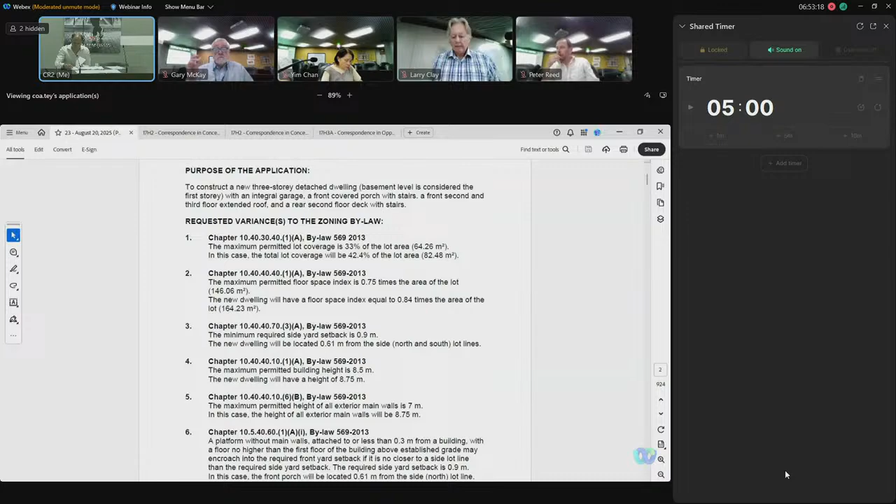Through the chair, we have the agent here in person and 6 registered speakers.

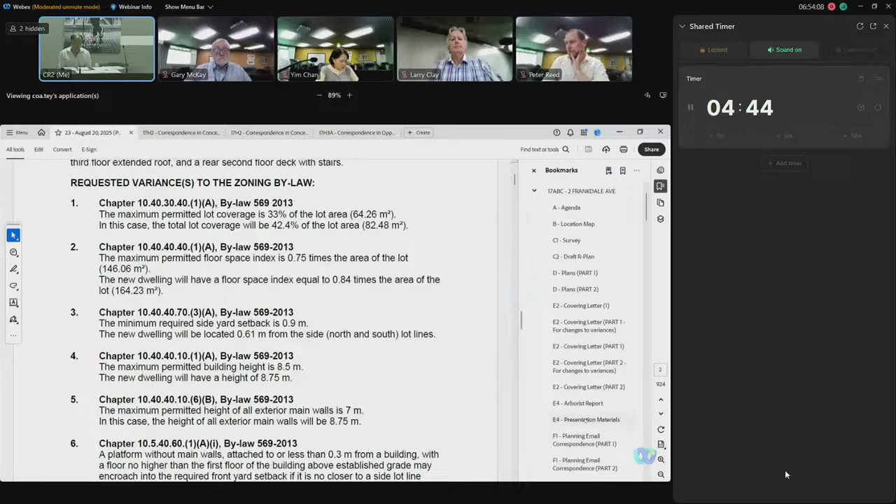The existing lot is fronting on the west side of Frankdale Avenue. To the south side is adjacent a private laneway serving a row of garages to the properties at Milverton Boulevard. To the north and to the west side, properties of single-family homes are adjacent.

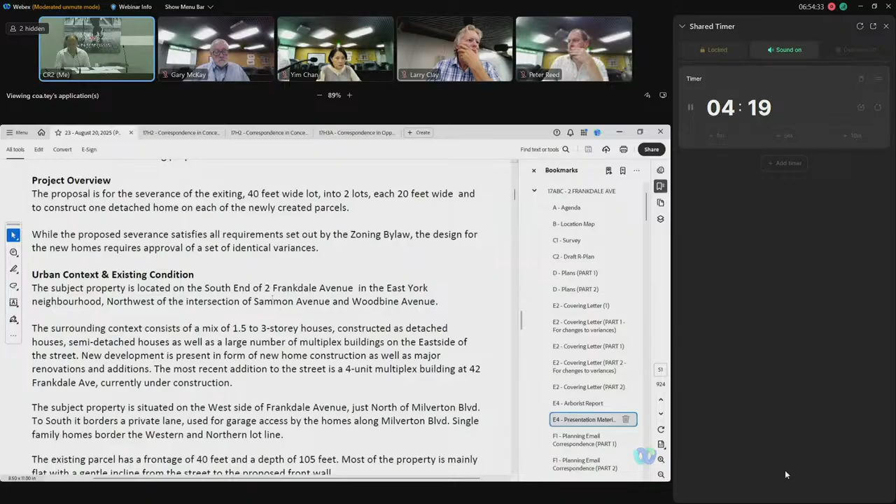The proposed severance does not require any variances, and similar frontages as the proposed can be found on the street and throughout the neighborhood. The proposed 2 homes are 2-story homes, while the notice says it's 3 stories.

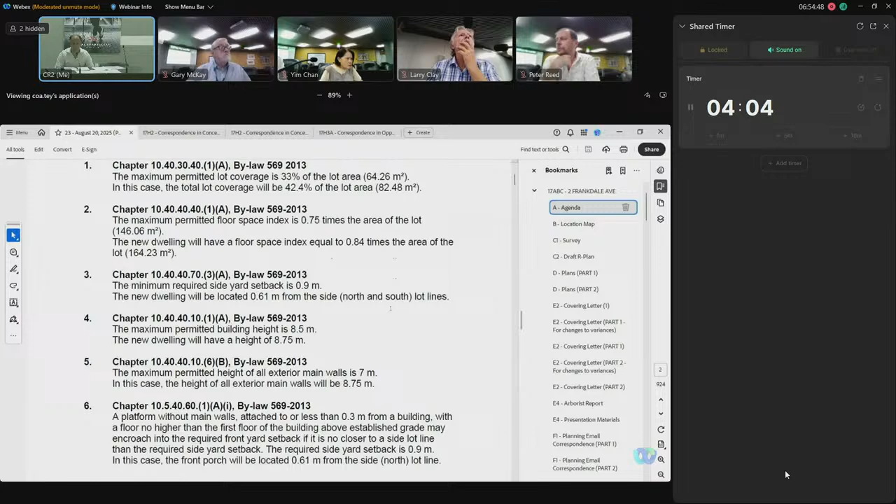The applicant—the examiner suggests that the garage, the integral garage, is the 1st story, and the 2 living stories above are considered the 2nd and 3rd floor. The garage is not below grade, and therefore, assuming that was the intention, naming it a 3-story home. But the zoning bylaw considers it a 2-story home.

Each of the homes is a 3-bedroom home in similar size and volume as can be found throughout the neighborhood. Each home is designed with a private driveway leading up from the street to the integral garage.

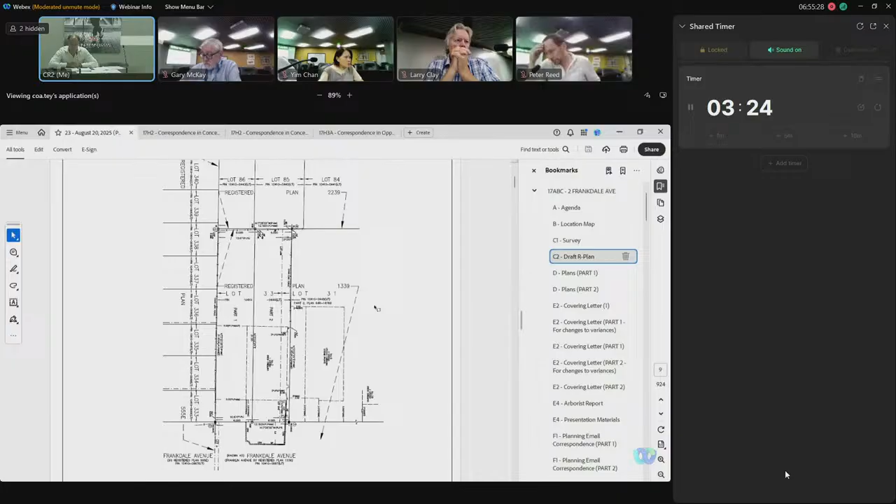Our application suggests the same 8 variances for each of the new homes. The proposed variances relate to lot coverage, floor space index, side yard setback, as well as building height and main wall height. The proposed variances are individually, as well as in their combination, very similar to approvals given in the past by this committee and are similar to the existing housing stock in the area.

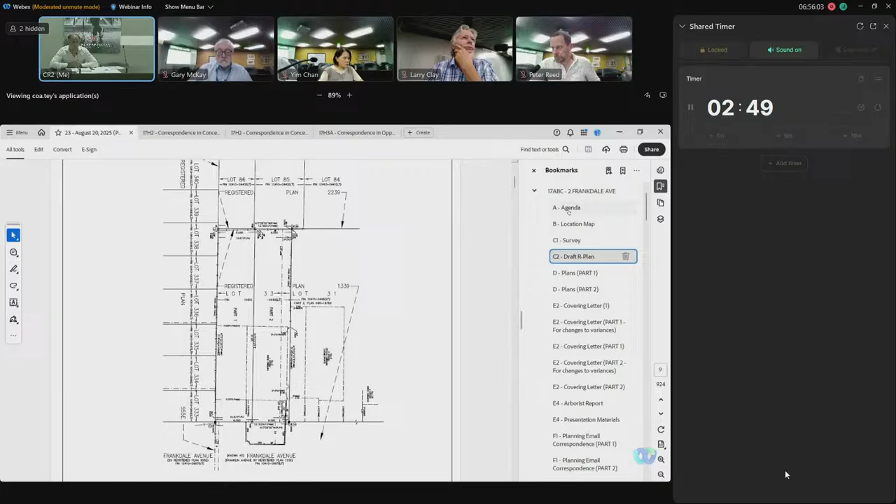I want to go a bit more in detail about the 2 variances regarding the height, as there seemed to be some confusion around the neighborhood. There's one variance that suggests a building height of 8.75 meters. If we could pull up the presentation material on page 3, there's a diagram illustrating this.

The 8.75 meters in height are 0.25 meters or 10 inches higher than the permitted, but this only applies to the front part facing Frankdale Avenue. It's a small parapet wall, which exceeds the permitted building height. The rest of the building and along the side wall as well as to the back satisfy the requirement of 8.5 meters.

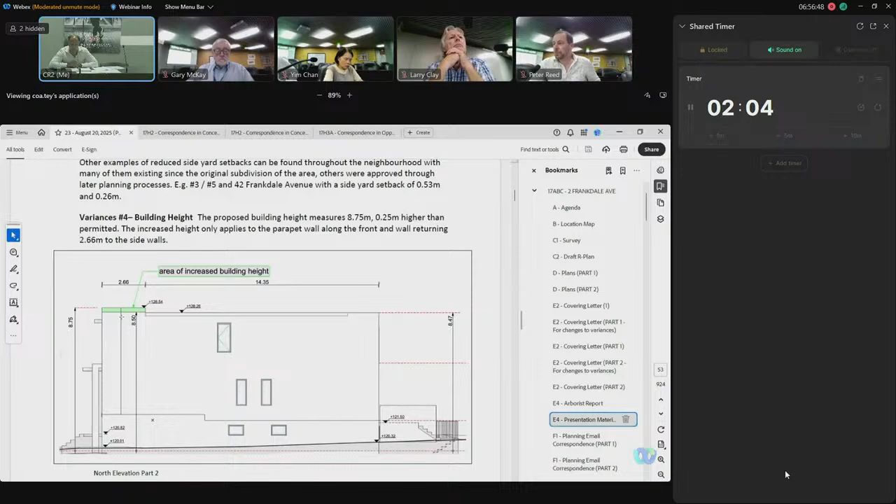The second variance regarding height is for the main wall height, which only references the front main wall and the rear main wall according to the bylaw. If you please move forward to page 4, it shows a three-dimensional illustration, while the left illustration shows the as-of-right height development. The right one is the proposed. As you can see, the difference between those two is marginal.

And even though the delta between the two numbers, between the proposed of 8.75 meters and the permitted of 7 meters, might sound high, as you can see, the difference is not very much.

Several submissions to the committee from the neighbors assumed that the homes would be 1.75 meters higher than permitted, but this is not the case. The total building height is only 10 inches more than permitted, and that only applies to the front.

Furthermore, the proposal satisfies all requirements regarding landscaping and soft landscaping. It will require removal of one protected tree at the south property line. The remaining trees, protected by city bylaw, will be protected during construction and will remain on site. Transportation services and community planning both provided comments and had no objections to the proposal.

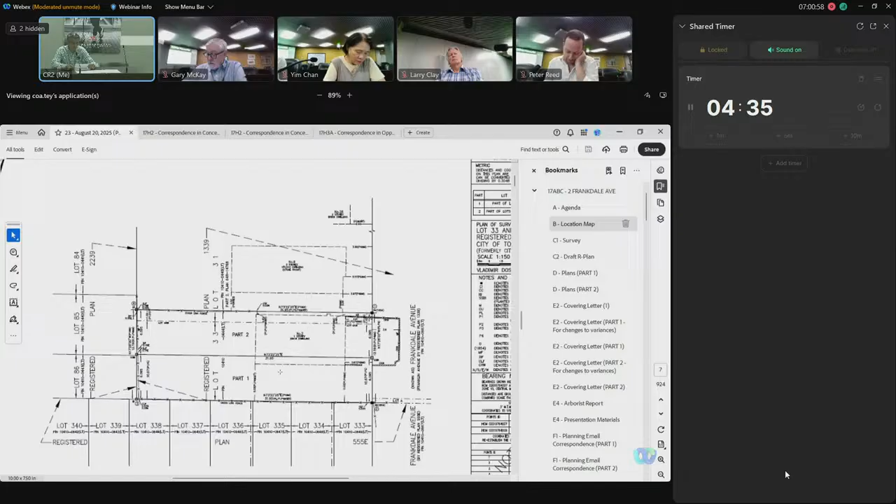Firstly, that the northern side of Part 2, the northern building, shall be kept clear of any below-grade windows and therefore window wells or similar structures. Second, that the northern side yard setback shall be kept clear of any fencing or similar structures from the front property line to the proposed wall. The northern side yard setback shall be paved from the public sidewalk to the proposed rear main wall.

These considerations would limit the impact on our current parking situation at 6 FRANKDALE, and ensure safety for both ourselves and the new residents.

In addition, we've agreed that the rear deck must be constructed with opaque privacy screening or fencing that is permanent along the northern edge of the deck, to a minimum height of 1.5 meters measured from the floor of the deck, and that any north-facing windows on the north frontage of Part 2, the north building, on the second floor above, should be constructed with frosted glazing in order to address any privacy concerns between ourselves and the new residents when they move in.

These considerations would address, I'd say, our two primary concerns with the proposed development. If they are attached, I don't know the mechanics, but if they are attached to the approval as conditions of the variances, then we would be prepared to withdraw the remainder of our objections. At this time I'd like to reserve any remaining time to discuss those objections if these are not ultimately agreed. Well, we can't let you do that, sir.

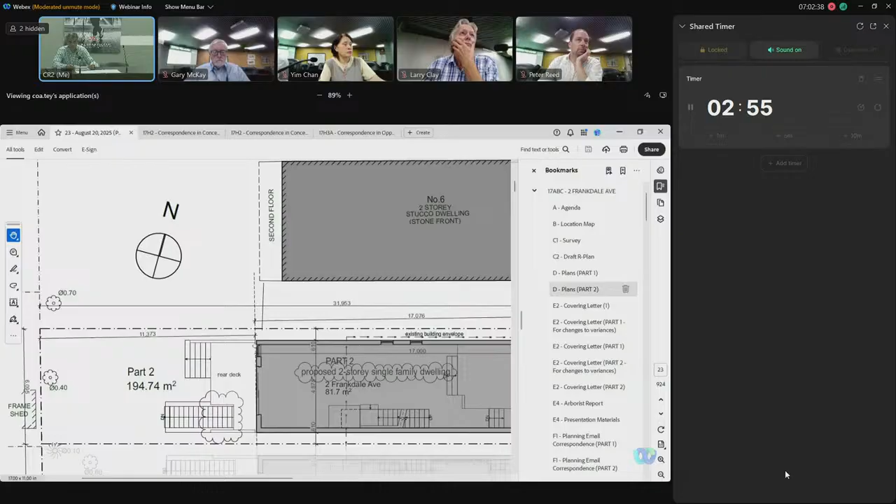You get one shot. So if you have come to an arrangement with the agent along these lines, he'll reflect that when he returns. Very well, you have the rest of my considerations in my letter, and you can reflect on them and consider them as you see fit. Great, thank you very much, sir.

Any questions now? Sorry, through you, Mr. Chair, perhaps we can just talk about which conditions the committee is in a position to consider, rather than those out of the hands of the committee. Good point, yeah.

Saying no windows on the lower level, my concern is about safety and building code. As for no fence or structures, we can't impose that condition because we don't know what could happen in years to come, and if it's as of right, the committee isn't allowed to impose something that is as of right. The paving from the front to the rear, maybe semi-permeable or permeable materials, but that's something up for consideration.

The rear deck screening, yes, the committee can impose that condition. And the frosted windows on the second level, the committee can also impose that condition, okay? Just for the benefit of knowing what the committee has the right to do and not. I understand that, sir.

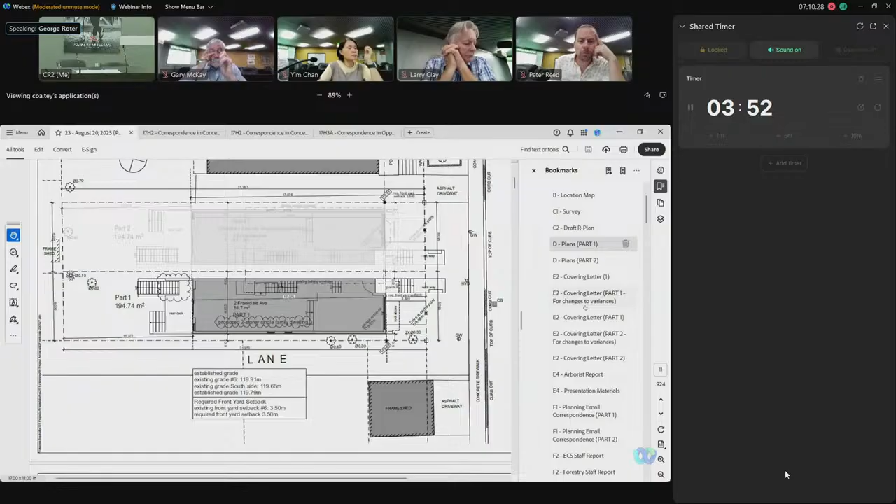What's there right now is a series of trees, not all protected. Some are a fence that separates things, and it has a backyard for us that is highly enjoyable, and that would change entirely with this development. The setback variance requested would reduce and change that dynamic. It would likely require removal of the fence and that separation. So that's one of our objections to how this is presently proposed.

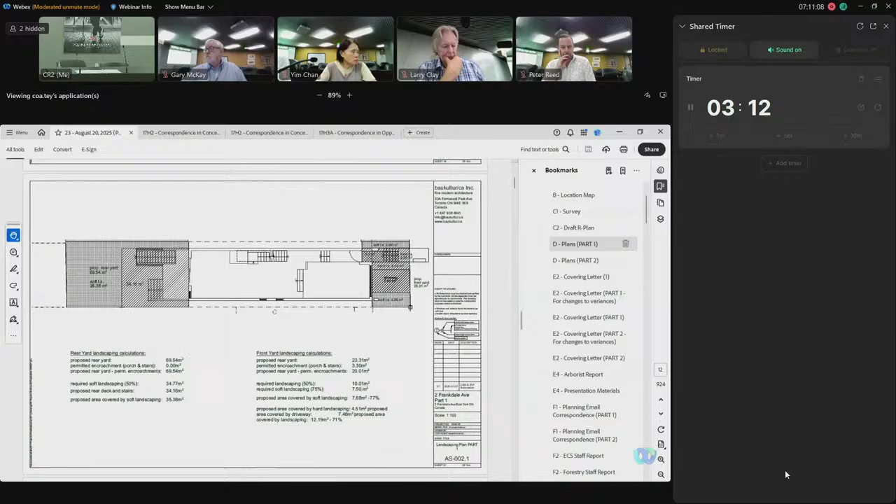The second objection is related to safety and drainage. The laneway is actually about 60 centimeters lower than the property of 2 Frankdale. What's holding that height difference is, first, there are no buildings really up against that line, so nothing is putting strain on it.

Second, there's a ton of vegetation and trees, not all protected, many aren't, but it kind of holds that area intact. Our concern is that once you start building close to that laneway, even closer than what's allowed under the bylaw, you're going to put strain on it, and there's no reference to reinforcing that.

There's no reference to a retaining wall that would make sure it's safe and maintained properly. In addition, you're removing fencing and vegetation, which is really a privacy screen. So we're concerned about that fence line and the development coming up so close to it with the variances proposed here.

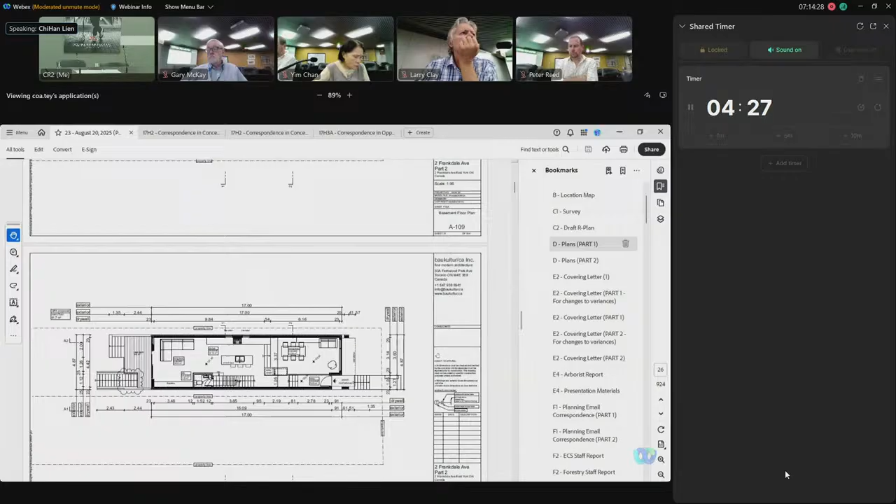That's not the same as a curved roof with a building height of 8.75, with the sides being a little shorter. That will have a large limitation on the view. So privacy is a big concern of mine, and drainage as well.

This past winter, with lots of snow, that back laneway is private for us, so the city doesn't plow it, we have to shovel it ourselves. Last winter I had to shovel nonstop as our cars kept sinking and getting stuck there. So we need space for the snow to go, and I have concerns with the south property being built that close to the line, exceeding the variance, and what that would mean for drainage and our ability to effectively use that laneway when there is water and snow.

I believe the application did call for removal of mature trees as well, including the one directly behind my property, which also provides shade and privacy. So those are really my concerns there.

I do echo that yes, there are buildings in the neighborhood with similar heights, but as George mentioned, they are all semis, not detached. I won't take more time since a lot of the points are similar, but really building height, privacy, and the use of the laneway and water drainage are my concerns.

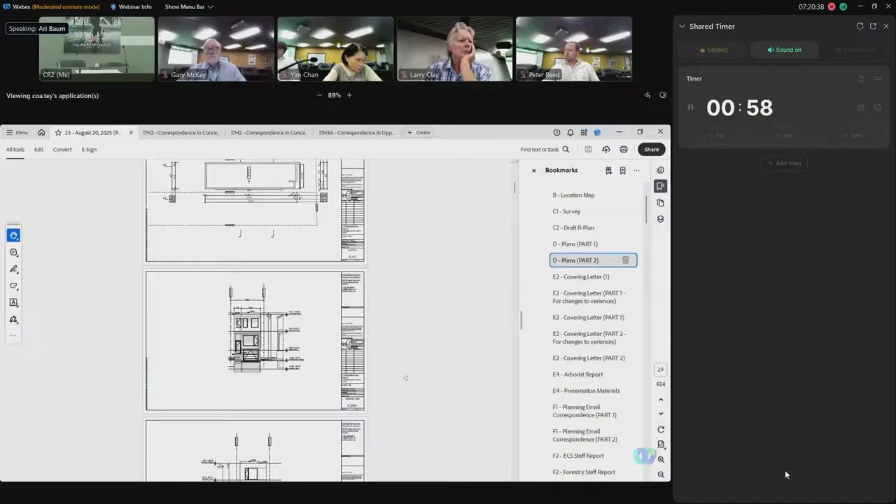So the variances altogether, all 8 of them, fundamentally alter the allowable built form, resulting in crowding and loss of neighborhood character, and risk setting a precedent for more out-of-character builds on both Frankdale and Milverton, which we don't want to see. The concern is also that the majority of the trees will be removed. I know a lot of them aren't protected, but we currently vastly enjoy the urban forestry in place, from a privacy and shade perspective, and don't want to see that altered.

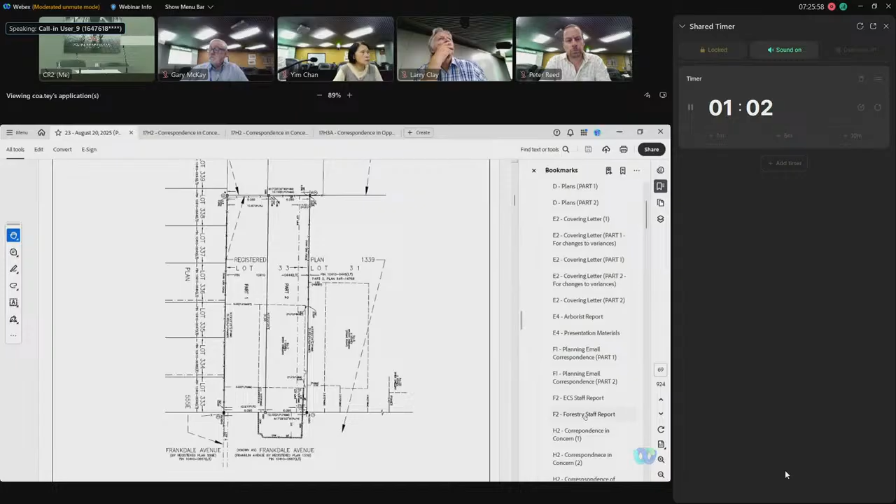Hi, this is Rick Brown. I reside at 170 Milverton, also south of 2 Frankdale. And I will probably sound like I'm echoing a lot of my neighbors' concerns.

I would like to confirm that I do support the applicant's right to redevelop, yet respectfully ask for the application to be deferred or denied for revisions based on our community feedback. Like others before me, my main concerns are that the 8 variances in their aggregate are not minor and will dramatically change the neighborhood's character, reduce privacy, potentially create erosion and drainage issues, and could ultimately affect property values.

Reinforcing the discussion of the need to remove trees along the south boundary, including one tree that should be protected by the City of Toronto, in addition to harming street aesthetics, wildlife, and privacy. I'm certain this is likely to cause drainage and erosion issues.

I would prefer to see maintenance of the 0.9 meter standard side setback to alleviate some of these concerns, or at the very least, if this proposal is approved, some sort of formal landscaping plan to mitigate the risk of erosion and drainage issues.

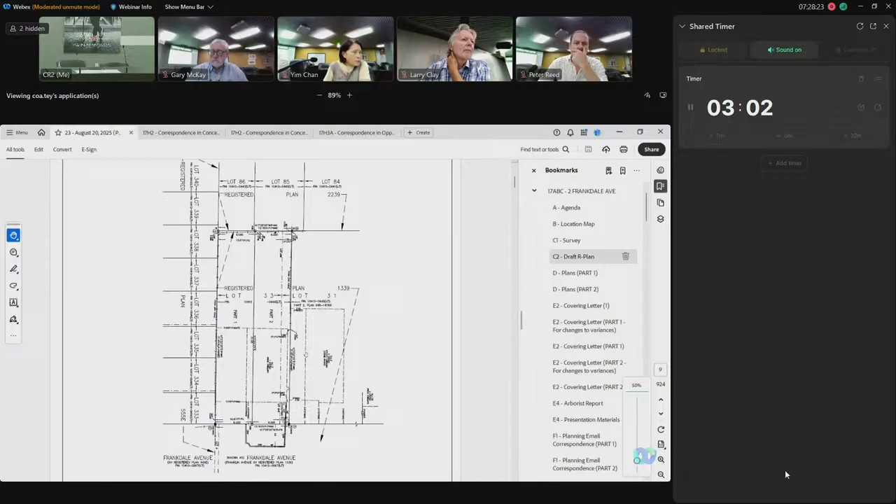It's not clear to me what future homeowners will do with their snow other than push it onto Frankdale Avenue. This will reduce visibility, further narrow our one-way residential street, and overall reduce driver safety in the winter. I know that's perhaps outside of the committee, but it is an implication or certainly impact of the proposal, and I just wanted to raise that as a potential issue.

And finally, while I'm not as technical on some of the bylaw rules and variances, I believe the applicant stated that the height variance was very minor and only applied to the parapet along the front facade and its return along a portion of the side facade.

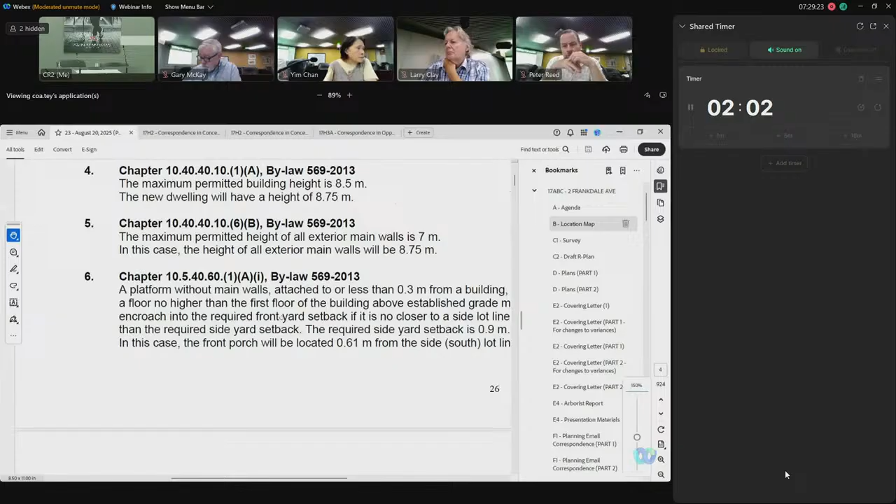Perhaps the committee could clarify, because the applicant did not mention that variance 5, I believe, requires the height of all exterior main walls to be no taller than 7 meters, including 100% of the sidewall. So again, I'm not sure if the presentation of it being an extremely minor height variance is accurate, or if it is in fact in excess of 1.75 meters, which, as others have called out, is extremely out of character and will tower over the existing buildings.

I really appreciate the time. Sorry I couldn't be there in person, and I look forward to hearing your decision. Thank you.

Panel, any questions? All right, I think that's the end of our speakers. Maybe we'll have the agent back.

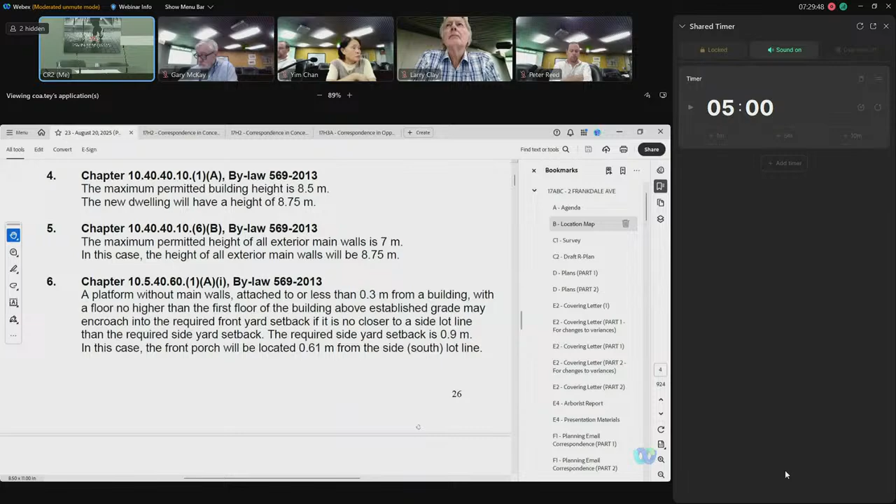So I'm going to be a little unconventional. One of the opponents indicated a series of conditions that you've agreed to. The other opponents are simply opposed to a whole bunch of things. So I'm going to cleave your time into two, because I think I owe it to that one individual to confirm your agreement to the conditions you've agreed on. Once you've done that, I'll start the clock and you can have your 5-minute rebuttal for everyone else.

Is that okay? Yep, for sure. Okay, so let's start with the conditions that you've agreed on with 6 Frankdale. Yeah, we agreed to all these conditions mentioned. You appreciate that the committee only has jurisdiction over some, so those that we don't have jurisdiction on, if the committee were to approve this, that is something you need to form an agreement with 6 Frankdale. Yes. Okay, you're prepared to do that? Yes. All right, sir, you have 5 minutes to rebut the concerns we've heard.

Okay, so the concerns we heard were often not related directly to zoning, but one major point mentioned was the grading and drainage on the property. This will be addressed during the building permit process. The grading engineer will prepare a grading plan and make sure that all the city requirements are met. Otherwise, no building permit will be issued.

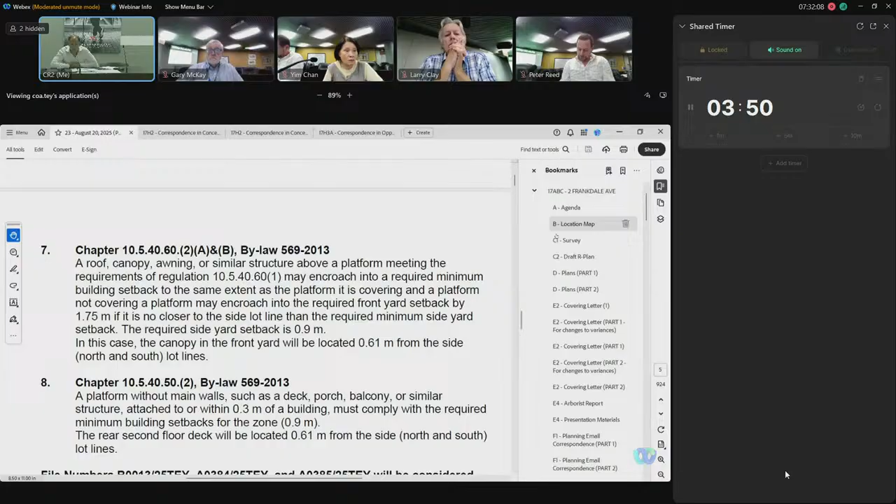Further, the last speaker mentioned the height again. The bylaw requires that the front and back wall of the building be 7 meters along 40% of these walls. So the difference between this and the proposed vertical wall to the front and back are marginal. The side wall is permitted to be at the full building height of 8.5 meters over the full length of the sidewall.

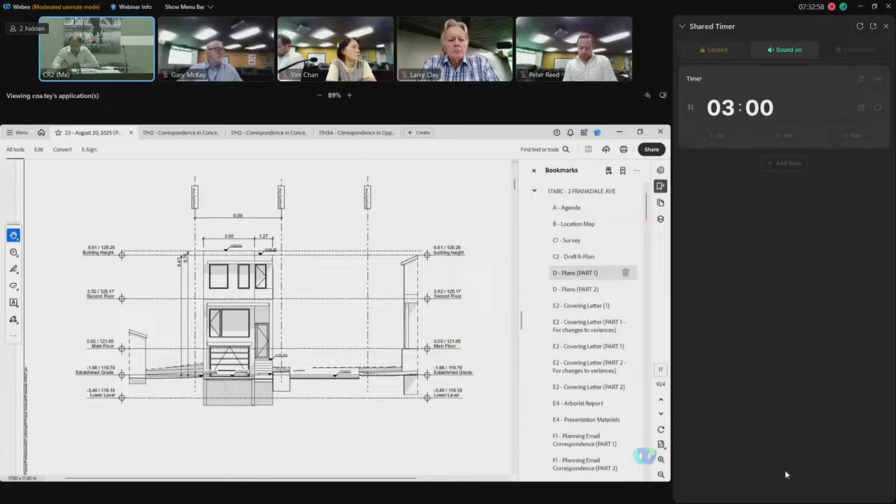Other issues mentioned were the privacy to the laneway. There are 2 kitchen windows proposed on the north side and 1 bedroom window. These windows, in my opinion, are from secondary rooms and therefore don't propose a major privacy issue. The so-called second floor deck, if you look at the rear elevation, is close to the ground and does not provide much overlook, especially considering that our client will build a fence along the wall, along the southern property line.

The mentioned objections to the proposed FSI and lot coverage, as well as side yard setback, are basically all variances. We researched the entire neighborhood and reviewed the past Committee of Adjustment positions. For every variance proposed, there can be found various Committee of Adjustment decisions which support our suggestion that the variances are minor and are in keeping with the intent of the official plan as well as the zoning bylaw. I can give you these examples, but I believe they were already provided with my presentation material.

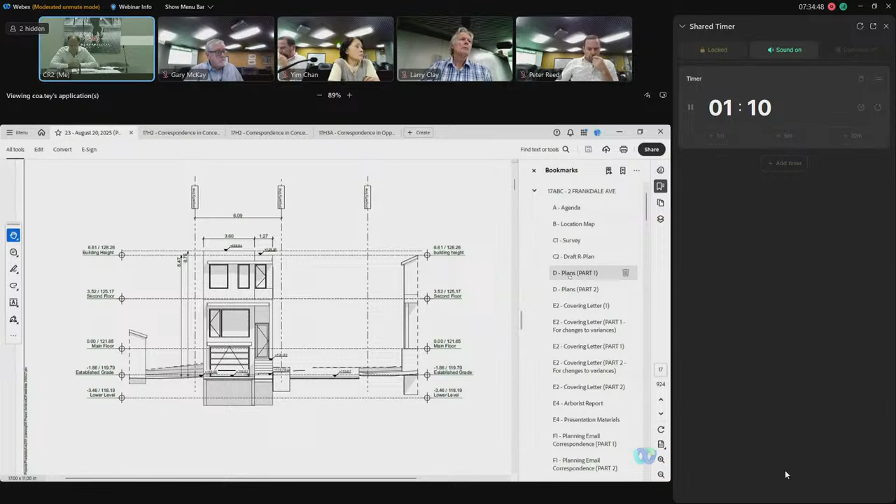One, or 2 or 3 neighbors, mentioned that semi-detached is what the neighborhood fabric is built from. There are multiple buildings or houses which are detached. For example, 6 Frankdale is a detached home. On the opposite side of the street there are multiple detached homes. Throughout the neighborhood, detached homes are a permitted use by the bylaw, so as long as the lot width allows for it, detached homes will be developed in the neighborhood and will further be part of the fabric. I believe I covered all of the concerns. All right, sir, thank you very much.

Panel, questions? Just a clarification - can the staff bring up on the package F1, the planning email, part 2? If you scroll down, it's F1, planning email correspondence, part 2. There's only 1 sentence on that correspondence. Yes, that one - I wonder whether this has been addressed and is outdated already.

It's mentioned that there's a deletion or elimination of variance 5. That variance, or that email, was produced after he submitted a set of revised plans. So that one is not even included in the notice in our agenda? No, okay, that's before the notice - I just wanted to clarify. I thought that there's a missing variance. Okay, thank you. All right.

Anyone else? Just with respect to the exterior main walls, there had been a question about height there and whether the height of those walls included a parapet or not. Yes, they include the parapet. The numbers in the notice include the parapet height. Thank you. Anyone else? Thank you, sir, that's our questions.

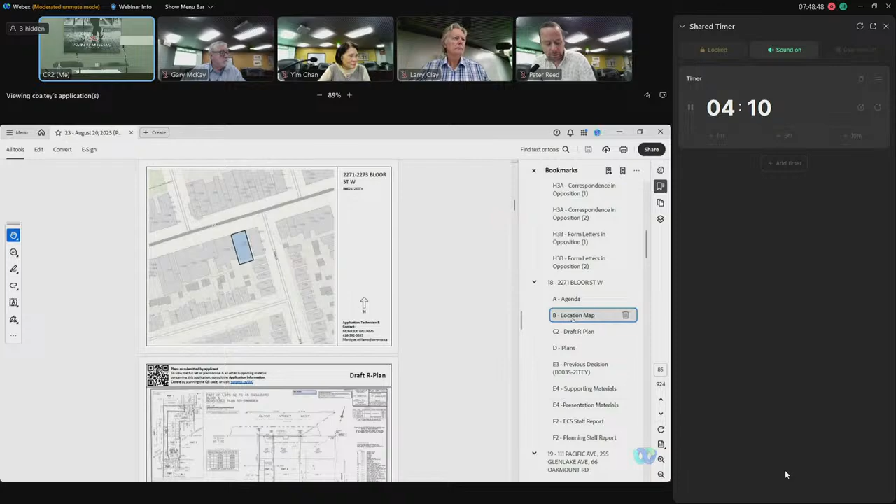Peter, you got a question? Thanks, Chair. Just to make sure you've seen the proposed conditions from development engineering regarding servicing. Yes, I understand those to be their new standard conditions that they're applying on every consent, and we're content to apply those as well. Okay, thanks. All right, thank you very much, sir.

We'll take this into committee. This looks like it's just rubber stamping what was done before. Yes, thanks Chair. I'm happy to - I think this is just a question of timing. But what's being asked for is very reasonable to permit the usage of two buildings. So I move approval of the application subject to the development engineering conditions. Motion by Mr. Reed, seconded by Mr. McKay. All in favor? You have your approval. Thank you.

Move on to item number 19. 111 Pacific Ave, 255 Glenlake, and 66 Oakmount. This is an application to obtain consent to sever the property into 7 lots with a residential development and create various easements and rights of way. There are no variances to this.

Committee has before it a copy of plan of survey, site plan, floor plans, and elevations, copy of draft plan of survey, landscape plan, 130 photographs of trees on the subject property, covering letter from the agent, an arborist report, presentation materials from the agent, and a site-specific zoning bylaw affecting the subject property. We have email correspondence from community planning and a staff report from engineering construction services.

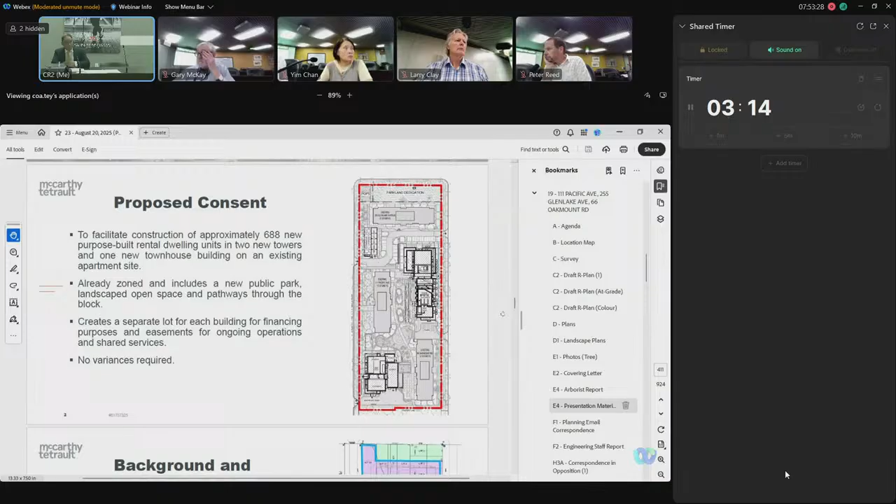It does not extend all the way south to Bloor Street, but it does have 3 existing apartment buildings on it. You can see one fronts on Glenlake and the 2 slabbier buildings each front on Oakmount and Pacific. In 2022, the OLT did rezone this land to permit 2 additional towers, which you can see on the diagram, as well as a townhouse building.

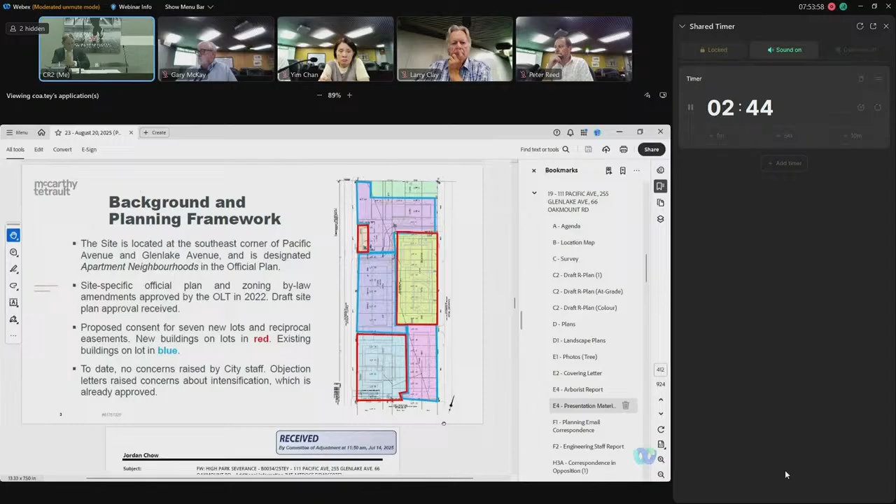The approved development will include new outdoor amenity space and will provide a new public park. The park is shown in green there and will front on Glenlake. A site plan application has been submitted, and the owner has in fact received notice of approval conditions. So this development is approved.

All we are doing today is creating new lots and associated easements. There would be 1 lot for each of the park and the existing and new buildings. The zoning standards do not need to change, which is why there are no variances in front of you. There's a provision in the zoning bylaw that notwithstanding any severance, the zoning will continue to apply.

As you have probably seen from the application, the list of proposed easements is rather extensive. That is in anticipation of the community operating as a single community and providing access to shared amenities.

Just for context, the new buildings are anticipated to be rental buildings. The existing buildings, the owner has agreed to maintain those as rental. And just a bit of background on the zoning, there is provision of new affordable housing units, at least 36 of them. 10% will be 3 bedrooms, 30% will be 2 bedrooms.

The owner has also agreed to provide new accessible washrooms and laundry rooms on the ground floor of each of the existing buildings. There will be a new indoor pool as the outdoor pool will be demolished. There will be new landscape improvements.

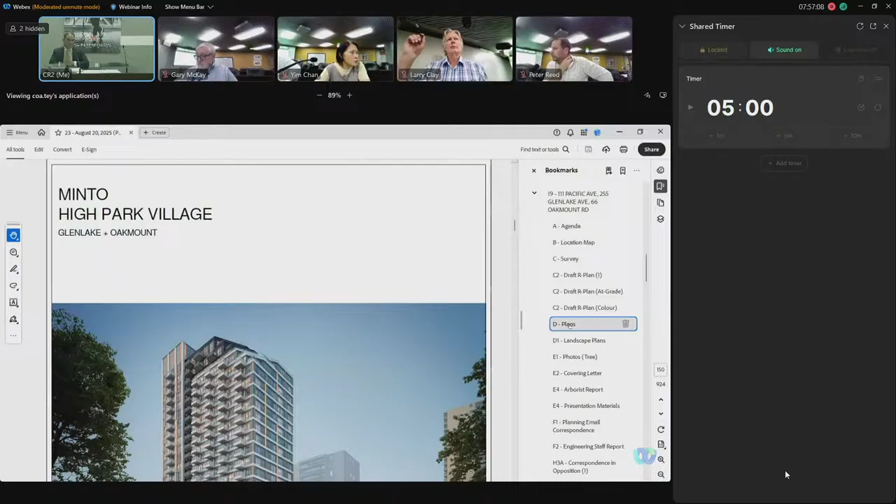Is that going to be privately owned public space, or are you ceding those lands to the city? So on the diagram that was in the presentation, shown in green, that space is a public park, a city park. That is city park right now? Yeah. Oh, it already is? No, it will be a city park. So you're ceding the land to the city? Yes, that's correct. Okay, that's what I was wondering. All right. Thank you, sir.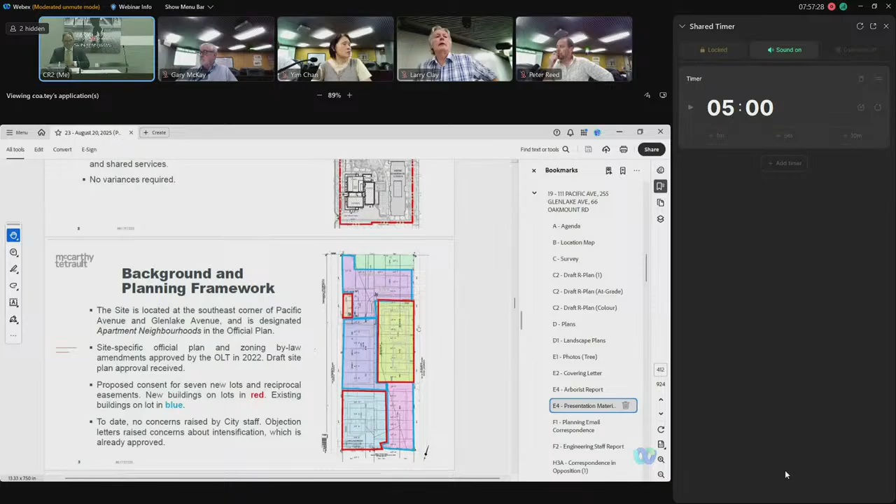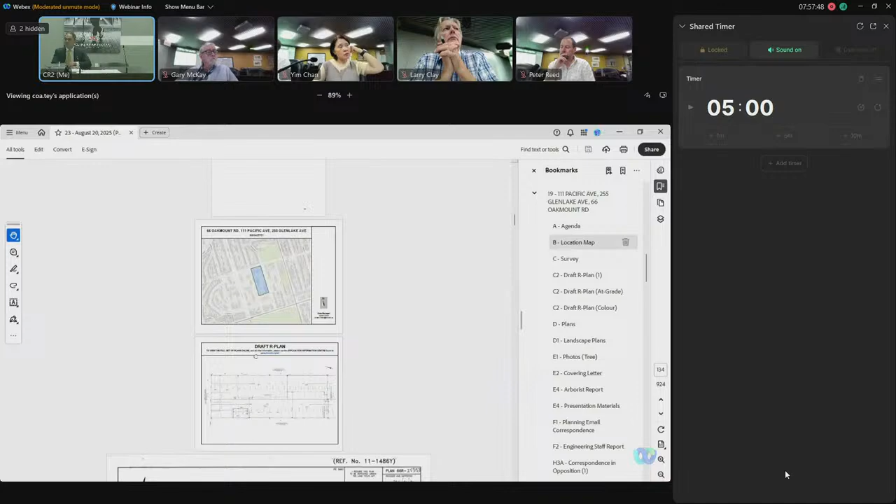Panel, any questions? We have some speakers lined up. All right. Oh, yes, you do. Phil, go ahead. Just an overall clarification. I understand the severance is needed partly to convey that park to the city because it needs to be severed from the rest, and this is to put in place what's already happened at the OLT. But what's the rationale, given the number of easements, and you mentioned it's meant to continue to function as one community, what's the overall rationale for your client if they're all going to be rental towers, all as one community, wanting to have the severances?

So financing a piece of land this size with this many buildings on it for construction purposes gets very, very expensive very, very quickly. So it is easier to finance the buildings separately. It would also facilitate phasing if phasing were required. Yeah, so to attach the financing to the actual towers as they go up. Yes, that's correct. Okay, thank you. All right. Thank you very much, sir.

We'll hear from some of the speakers. Is there anyone in this room who wants to speak to this item? Ma'am, are you speaking to this item? Well, are you registered to speak, ma'am? Yeah, come on up then. Hi. No, is your red button on there? Button? Okay, yeah, that's it. If I have your name and address, please.

I'm Valerie McLean, I'm at 103 Glenlake, 255 Glenlake Avenue. I'm a brand new resident there, so I felt I didn't get a chance to exercise my right or anything. I didn't know anything about this project until a month ago. So I'm a little uneasy about this whole project because when I first came into this building, I found out there was an outdoor pool and a barbecue, and those are the values that I see. I'm from the Six Nations, so I prefer green space and a quiet space. I actually suffered a stroke before, so I seek a quiet retreat, a nice place to be around nature.

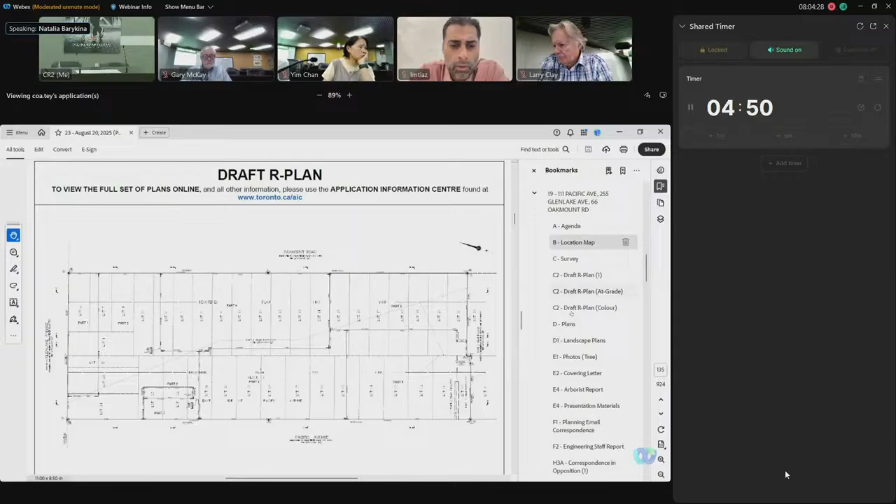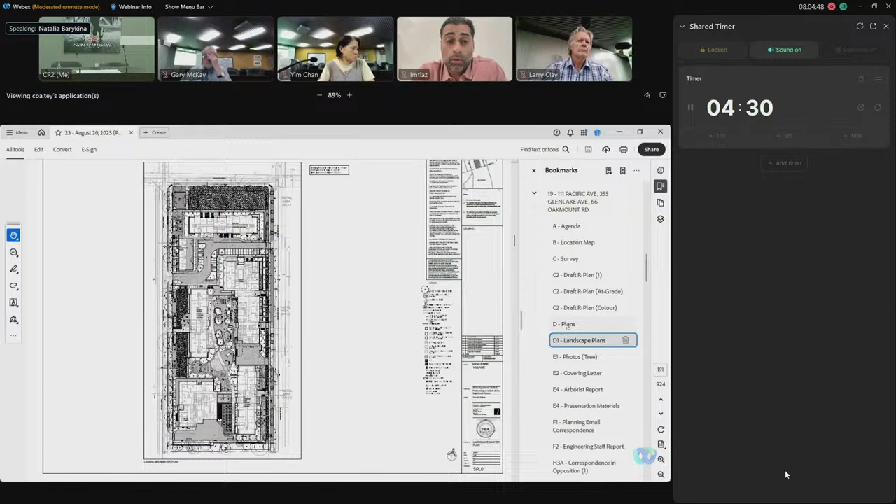Thank you. Well, I would like to express my objection to the proposed severance and the resulting development, which I believe does not conform to several requirements of the official plan. In 2018, the City of Toronto completed the area-based character study of the High Park apartment neighborhood, and this study resulted in City Council adopting site and area-specific policy number 551 regarding this area. As a long-term resident of the area, I am concerned that the proposed severance and resulting development do not conform to the policy in the following ways.

First of all, as per policy, future change and appropriate infill opportunities in the area will need to be sensitive and enhance the High Park apartment neighborhood area character. An addition of two tall buildings, I believe, will negatively impact the area's distinct character. The area's uniqueness is rooted in a tower-in-the-park idea, a plan and vision based on design of residential buildings generously spaced apart within areas of tree-covered open space, thus respecting the balance between built form and landscaped areas. The proposed addition of the two tall buildings does not preserve and enhance the park-like setting, generous open space amenity, and soft landscape areas that contribute to the character of the High Park neighborhood.

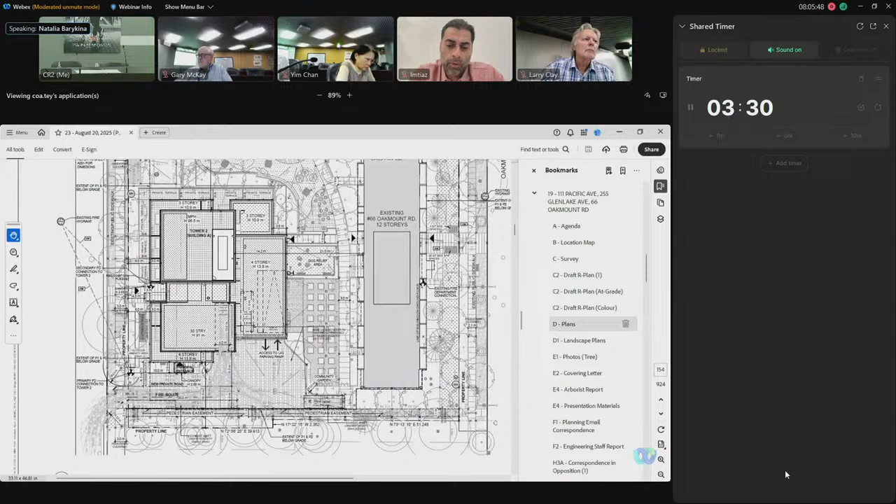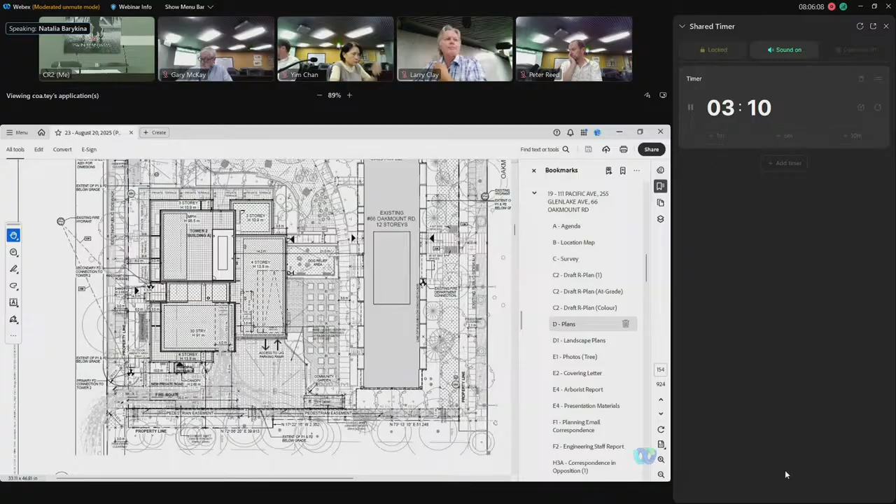The sites of the future proposed development currently include areas with mature trees, a community garden, and an open swimming pool. These lands are not underutilized. Rather, they are actively used by the residents as community spaces for much-needed refuge from heat in summer months, as evidenced by numerous objection letters and the speaker just before me. Removal of these spaces will negatively affect the quality of life and health of the community of which I am a part. I am also concerned with diminished access to sunlight, new shadows cast on open space areas.

And an exacerbation of already existing neighborhood problems of traffic congestion and noise pollution. The density increase should not come at the expense of extensively used community green spaces and the benefits they provide for physical and mental health. The proposed development also lacks meaningful integration of community services and facilities.

A new municipal park proposed for the street frontage of 255 Glenlake Avenue offers no additional benefit to the community. The already existing open landscape is being used by residents to walk their dogs and to socialize, so very much in the manner of a park. In addition, Lithuania Park, with excellent renovated amenities, is located across the street.

In conclusion, I welcome responsible development and gentle intensification of the High Park apartment neighborhood area, grounded in principles of enhancing the natural and living environment for existing and future residents through construction of new low and mid-rise infill housing, while preserving trees and vegetation, introducing green infrastructure and traffic calming measures. However, the Minto proposal needs to be evaluated in the context of similar large-scale development proposals currently in the works for the High Park apartment neighborhood area and the vicinity. Such proposals are damaging to the planning cohesiveness in environmental, community, and built form aspects. I welcome thoughtful revisions and scaling back of the current proposal. Thank you for your time and attention.

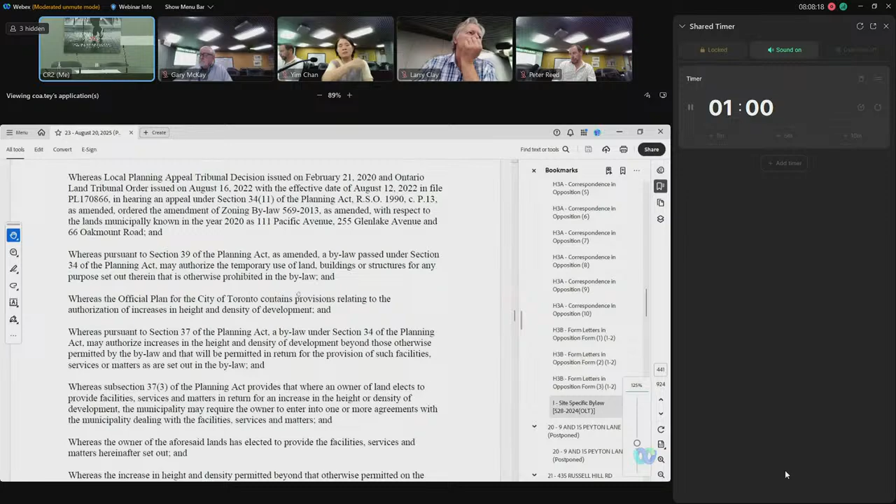I hear your objections, but I just want to point out that the additional two towers, how they're designed, the layout of the space, this has all been approved previously at the Ontario Land Tribunal, and we have no power to change that. It is approved. So all we're doing is creating, or being asked to do, is create new lots, one for each tower. Do you have any issue with the creation of new lots, one for each tower? No, I don't. Okay, thank you.

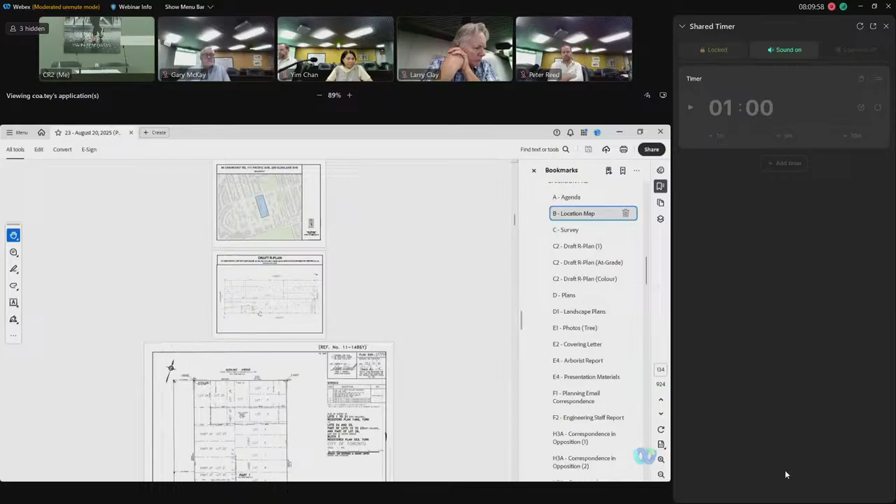Hello. Sorry, I'm just having some difficulties unmuting the speaker. MTS, we're going to try to contact you again. Through the chair, I'm just making one final attempt. Okay, all right, we've tried several times to reach, is that the 266 Glenlake? That's correct. Yeah, so we've tried several times to reach and we're unable to, so we will have to move on.

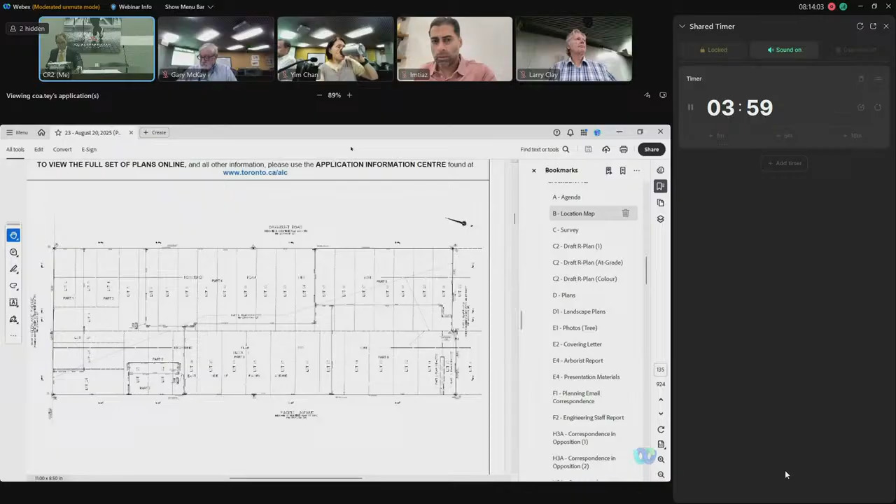All right, let's take this into committee. I think Phil makes probably the most important point here, that we're not relitigating the actual application. We're just considering the facilitation for financing and phasing purposes. So does anyone either want to comment or maybe just make a motion?

I would just make a motion because really it's a technical procedure, almost. So I will move to approve this application with no... do we have any? There's engineering. Yes, you have mentioned all the conditions, all the engineering conditions. Okay. Motion by Ms. Chan to approve subject to engineering, seconded by Mr. Reed. All in favor? You have your approval, sir. Thank you.

Okay. Thanks, Gary. Sabrina, Gary's going to head off. All right. What's that?

All right, are we good? Okay. Item number 20 has been postponed, 9 and 15 Peyton Lane. We move on to item number 21, which is...

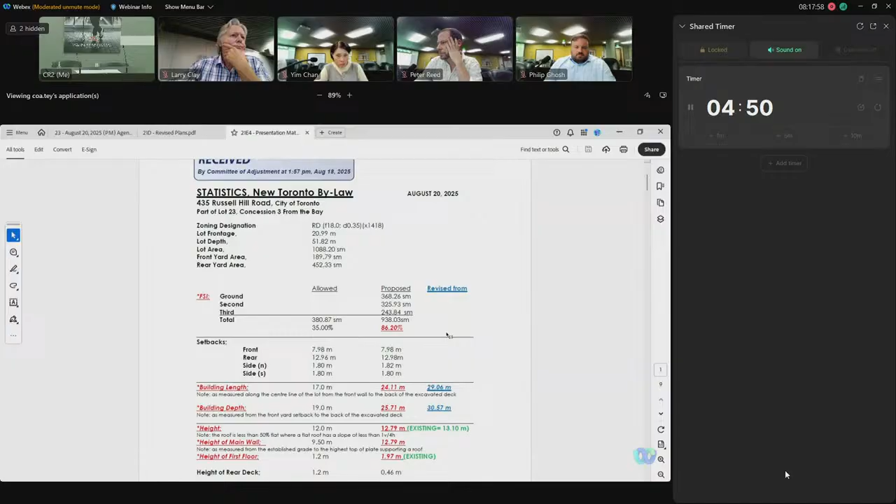So the two things, Mr. Chair, are first, there has been a reduction in both the length and depth. The new numbers, 24.11 for the length, 25.71 for the depth, they are on the public notice, so I don't officially need to revise anything, but I did want to flag for you, since the last public notice in the deferral, we have reduced the length and depth of the proposal.

The second thing, Mr. Chair, is there is now an urban forestry memo in front of you with recommended conditions of approval, should you see fit to authorize the variances. So we've worked with urban forestry to ensure that they are not recommending a refusal, but are recommending conditions of approval.

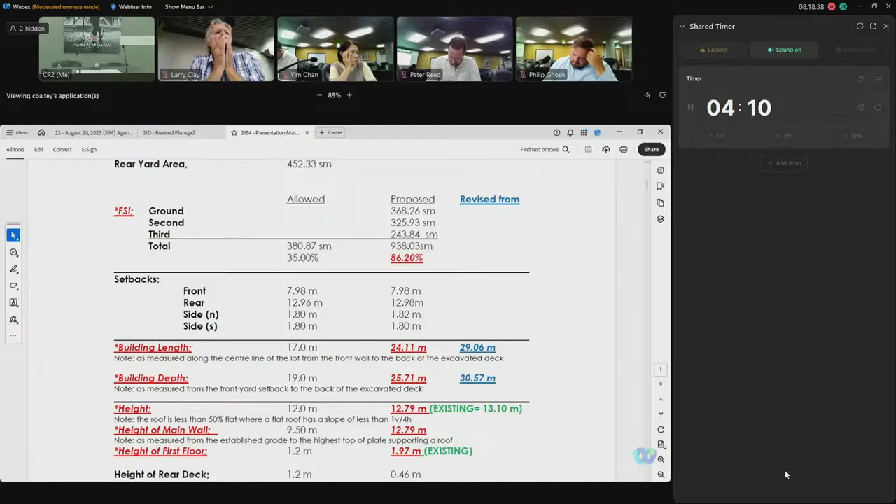In terms of the application, if staff are able to go to the second page, as usual on these application materials, what we've shown to you here in color is in green, the existing house, in red, the permitted envelope, the proposal, 3 stories, staggered, as you can see, up through the roof, which I'll show you on the colored rendering. But I think importantly, designed to maintain the staggered front yard setbacks along Russell Hill.

You can see that the 1-story addition that's on the south side, north is to the left, south is to the right. You can see the 1-story extension that is on the south side is no deeper than the existing dwelling to the south at 433. And then the staggered nature of the dwelling is such that the main 2-story portion is slightly behind 437, but that's in part because the front wall of the proposal is behind 437.

I would suggest that the committee, should it see fit to approve the variances, tie us to the site plan to ensure that the length and depth are deployed as shown.

If staff don't mind just turning to the next page, page 3, we've shown for you the different dimensions for each floor. So third floor, 18.48, second floor, 19.14. So not particularly deep in terms of a house. And then the ground floor and overall what's triggering both the length and depth at 24.63.

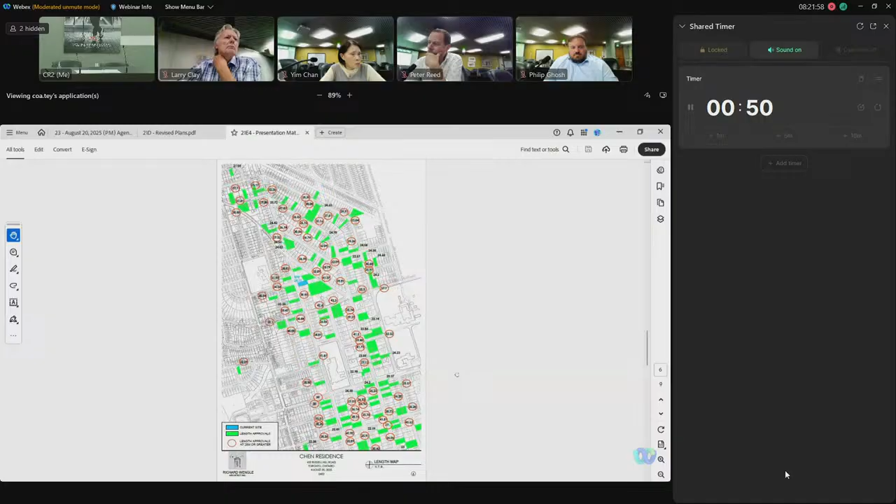Page 8, if staff don't mind, I can just show you what I mean by the staggered design. The 3rd floor is part of into the roof line. That in part triggers the height variances that are before you.

I'll just speak to those really quickly in my last 30 seconds. The existing building actually has a height of 13.1. We're proposing 12.79 when 12 meters is permitted.

There's also a main wall height variance, and that's frankly because of, and if staff don't mind, apologies, if you could just jump back to page 4, you will see on the sides there, dormers, just to allow some light into that 3rd floor. The main wall height is measured to those dormers. Those dormers don't extend for all of the roof line.

And so if the committee wanted to tie us to the elevations, we would have no objection, again, to ensure that those dormers are what are triggering the main wall height and that it's not extended beyond what's shown. So that's sort of the overview, Mr. Chair.

Thank you. Panel, any questions? Can we ask it now or we wait for the other speaker?

If it can wait, only to clarify, Mr. Bronskill, from the previous application you have reduced the depth by about 5 meters. I compared it to the previous site plan. How did you do it? Where did you get it done so you can reduce by almost 5 meters, right?

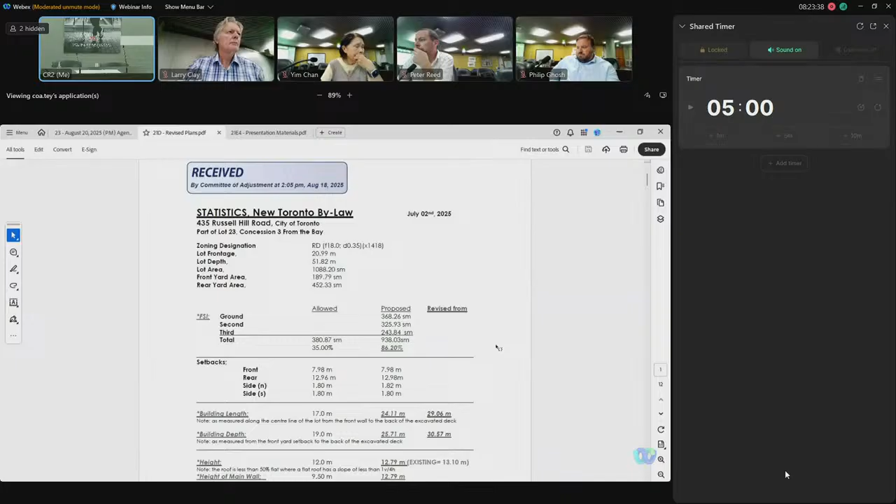Yeah, some of it comes through reductions in the excavated portions that don't necessarily count as GFA. We wanted to ensure that numerically we were reducing the overall length and depth. There was some excavated area that extended beyond and deeper into the rear yard. We pulled that back and also did the stormwater drainage assessment that was filed because there had been some concern raised with that. So the length and depth was largely, frankly, below grade previously, and that's been significantly pulled back in terms of the extent of basement excavation.

Oh, if I understand you, it means that you just reduced your excavation area. Yeah, the length and depth went much further. You can see that under the terrace that was previously proposed, there would have been excavation. You can see it there. It actually went underneath that terrace area and further back, so it frankly got close to the rear yard setback previously. We pulled that back so that it's not as deep into the rear yard.

We think that improves overall the ability for stormwater penetration, so we do think it's meaningful to do that. It takes away some of that below grade structure in the backyard. The building remains, we think, appropriately designed to sit next to its neighbors. Oh, so you pulled back by 5 meters, right? Because it's hard to, because it's very complex, these drawings. Yes, I just cannot read it. Okay, yeah, okay, thank you. No, thank you. Thank you.

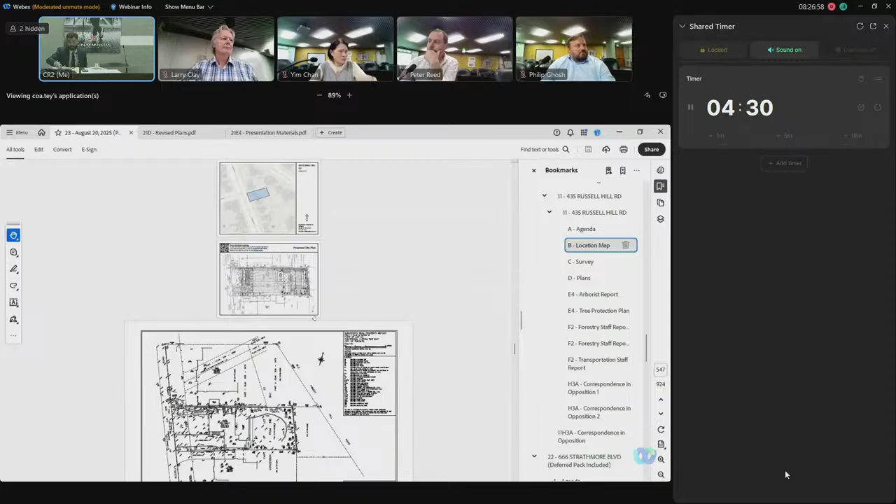My client's property is below, at a point on Russell Hill where there's a significant downward slope. What that means is that there is a portion of my client's property, particularly as you go towards the back, where we are sitting at about 2 meters below the subject property. It's a very significant change in grade that will be felt by my client. So as far as all the surrounding neighbors, it's my client who's going to be most directly impacted by this because of where they sit, and they have significant concerns with the proposed variances.

The primary variances that we have concern with are the wall height, density, and building length. I heard Mr. Bronskill talk about the main wall variance, but that's actually not the variance he's seeking. He is seeking a sidewall variance. That's variance number 1, so I think he was mistaken, and we have significant concerns with that variance. The sidewall height, you can pull up the building elevation, is where you see the 12.8-ish height. That's what's going to be felt by my client.

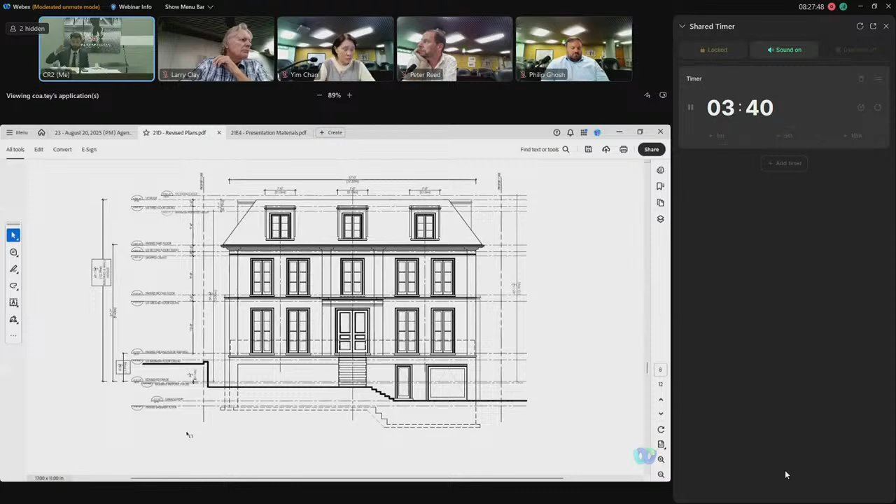I think it's a little bit misleading, actually. With respect to Mr. Bronskill, I understand why they showed it this way, but the one-story bump out at the existing property, as it exists today, is a one-story with a solarium on top. If you look at the south elevation, that is a significant departure from what is currently existing.

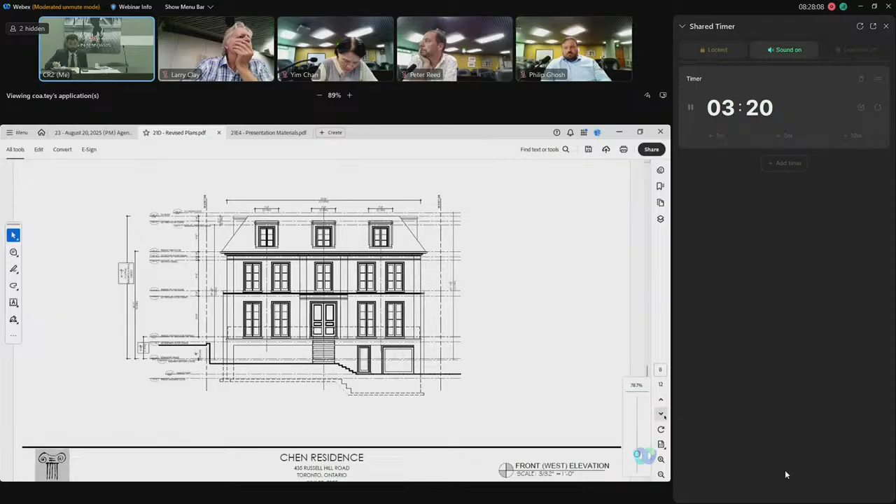Now, the bylaw permits 9.5 meters for sidewall heights. What's being proposed is 12.79 meters for 35% of the width of the sidewall, and 10.05 meters for the remaining 65%. So there is not one portion of that sidewall that meets the bylaw requirement. Then if you consider the grade differential, which is as high as 2 meters, you now have a sidewall that's going to be perceived by my clients at close to 15 meters. Considering a mid-rise building has a standard story of 3 meters, they're going to be looking at a 5-story building.

That's the context of that height. Thinking about the intent and purpose of the sidewall height bylaw requirement, it's to ensure we don't have sheer interfaces, a canyon or a massive wall on adjacent properties, and I think this is really problematic. Not only does it exceed the height from the bylaw significantly on paper, how it's going to be felt in real life is going to be far more significant.

And with respect to Mr. Bronskill, he didn't even address it. This is a very important variance, and it's going to be felt, and it's going to be compounded by the density and the length, but it's primarily that wall height that's going to be felt. Mr. Bronskill also showed his charts of variances for the density, length, and depth. Not a single variance for that sidewall height.

Now, the committee is required to consider whether this is in keeping with the character of the neighborhood, and there's not one example, and that's the applicant's onus. Then keeping in mind we have this 2-meter grade differential, that's where the impact comes in. So we think this is seriously problematic and hasn't been addressed in any of the revisions.

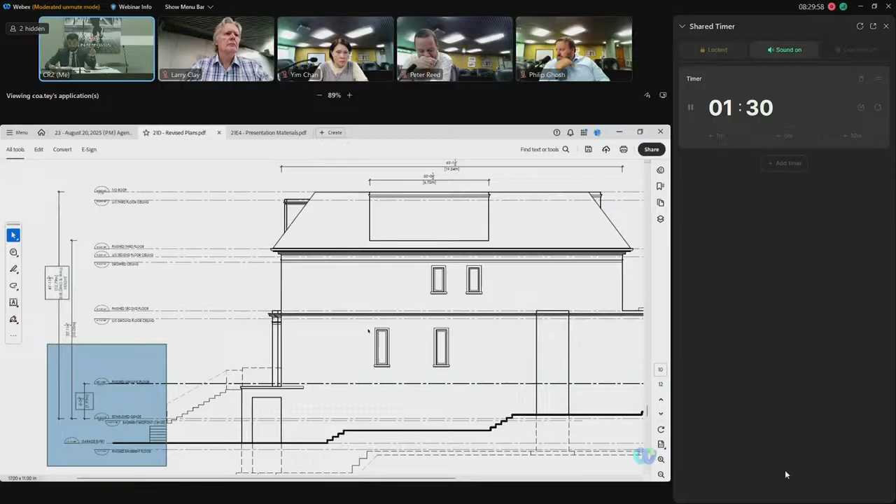Two other concerns we want to raise: tree removal and heritage. What the committee will see is that urban forestry staff had initially proposed refusal of this for 3 reasons: the length, the depth, and the density. The length and depth have changed. The density has not, and I think urban forestry was right the first time and wrong the second time.

Because the density hasn't changed, there's still 3 private trees proposed for removal, and 11 proposed to be injured. These are healthy, mature trees. So if it was a problem then, I think it's still a problem now. All they've done is reduce a couple of the tree removals. It's still problematic, and urban forestry put before you that the committee has to consider OP policies related to protection, preservation, and enhancement of trees, and I don't think that's being respected with this application.

Now, I recognize this is not a designated or listed building, but the city's official plan does recognize that heritage conservation is an evolving process, and you have the test of desirable. Is it desirable to demolish the house of the Prime Minister? I don't think it is. I really think this is a treasure for the neighborhood that needs to be protected. Plus, there's also significant architectural and design features. We think this should be refused. We don't think it meets the 4 tests.

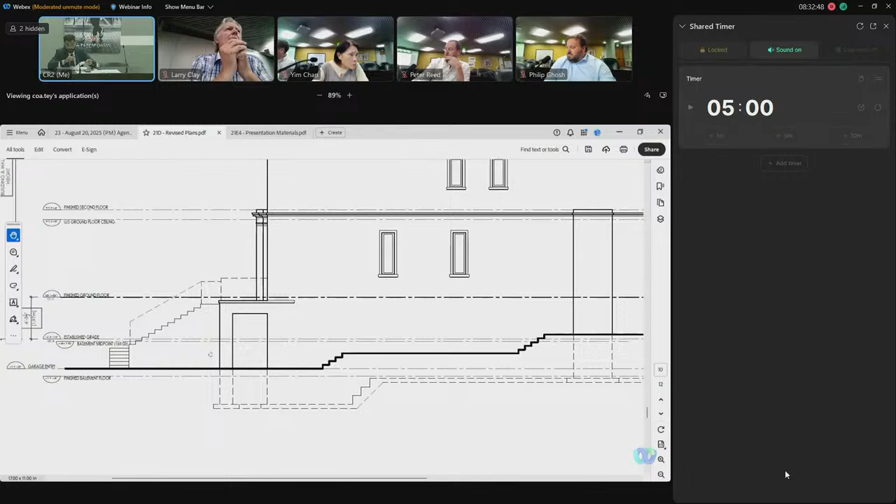It looked that way. But when you move to the back, to the rear of the property, that's where you see the grade change. As I've got the proof here, sir, if you look at the architectural plans, the survey, you're at 170.4 MASL, we're at about midway through the property. It's 170.4 meters above sea level.

And then on our property, it's 168.34. That's straight 2 meters, at the highest point of the grade differential. As you go a little bit further back, it goes down to 1 meter. But mid-property, where we're going to see that big wall height, we're at 2 meters.

And mid-property, as you describe it, there is what looks like a 2.5-story structure there now, in terms of the existing building, right? It's more so, sir. This is in our objection letter, I just pulled it out for you. It's a 1-story bump out with a glass solarium on top.

So I will ask the agent, frankly, roughly the height differential between that existing structure and what's being proposed. I'm just trying to make a relative comparison to old versus new, if that's okay with you. Certainly is, sir. But keep in mind, I think there's a big difference between the structure and what's really a temporary glass solarium. Fair enough, all right, thank you, sir.

Any further questions? Phil, hold it, you can't go yet. Sorry, Phil. I did enjoy your point on the history of the home, but it's not a heritage designated home. It's not a heritage designated home? And the length of time that Prime Minister Turner was Prime Minister while living in this residence was? He was Prime Minister for a very short period of time. That's true, he was the leader of the opposition for several years after that.

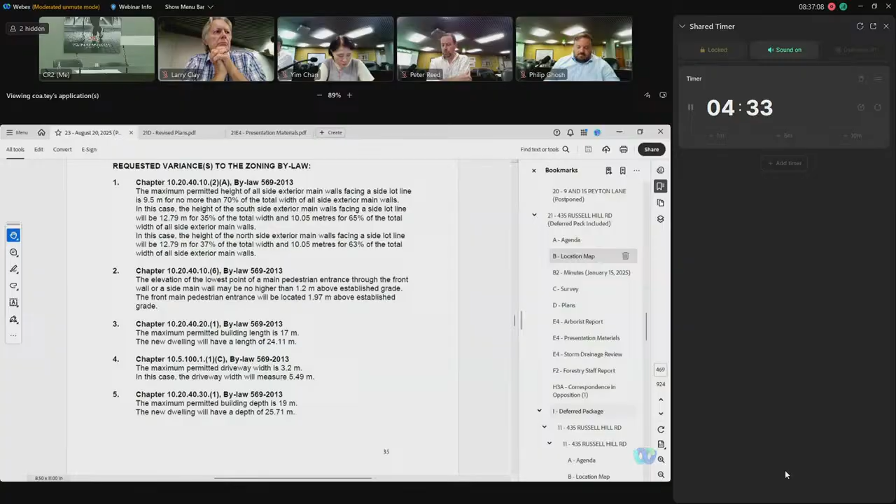Through you, Mr. Chair, I think Ms. Chan picked up on my point, which I addressed about the side wall height. I flagged for you it was the dormers on the side. I showed them to you on the elevation, and Ms. Chan has rightfully pointed out it's not a variance that applies to the entire side elevation. Staff, perhaps if we need to, can pull up the plans and I can show you the side elevations. Mr. Helfand suggested to you it's a sheer wall for all of that side elevation. He's wrong, with due respect. It's that dormer. That's why I think you should tie it to the elevations. That triggers the side main wall height variance.

Otherwise, to the underside of the soffits, it's a sloped roof, about 9.6 meters, and that would otherwise be the main wall height and would basically comply. So when he suggests it's a 5-story sheer wall up against his client's property, I don't think that's fair or accurate. It's those dormers on the side. So you tie it to the elevations, and the main wall height variance being sought would secure those dormers, but wouldn't otherwise extend to a sheer wall. That's why I took you to the rendering in the package, and we can look at any elevations you want to show there is a sloped roof on the side. So it's not a sheer wall.

In terms of the grade change, I also think it's a little bit misleading, because where those dormers are located, if staff can pull up the survey, the survey has very clear data elevations. Mr. Helfand took you to the back where the 1-story is at 170.4. If you look at the side property line next to his client's house, carport and driveway, you'll see 168.19, 168.32, and in front of his client's carport 168.11, 168.08. So where those dormers are roughly situated, the grade's almost actually the same.

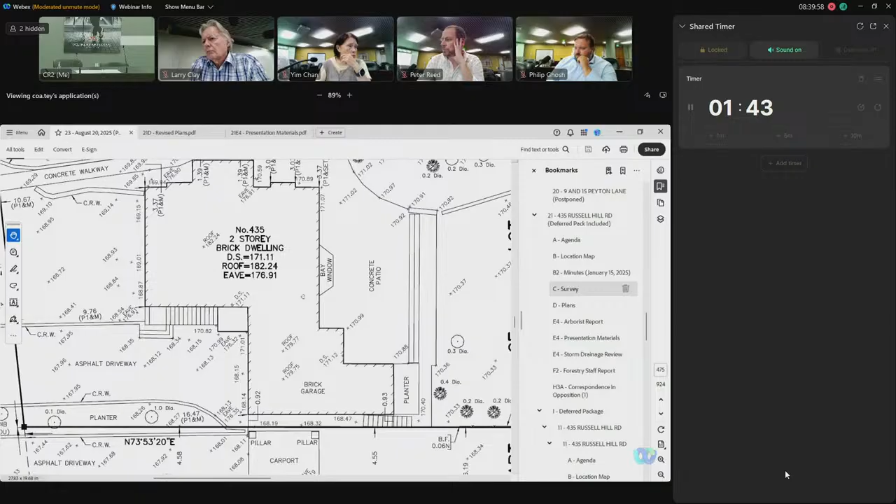So what Mr. Helfand is really talking about is as you get into the backyard, his client's property falls away and my client's property does not, so there is a grade change. But there isn't a 2-story structure in that location, just a 1-story structure. While you're on this survey, you can see the measured top of his client's house for their 2-story dwelling is 178.25, 178.27. The existing roof on top of the garage for my client is 179.75. It's a fairly significant 2-story structure over top of that area today, which we outlined for you in green. So I think it's an exaggerated impact to suggest there's not only a 2-story wall along that property line, but that it's going to be perceived as a 5-story sheer wall. I don't think that's fair based on the materials or the plans in front of you.

Last 2 things I'll say, Mr. Chair, and then I'm happy to answer any questions. We worked with urban forestry. There's no arborist report in front of you to contradict urban forestry. Urban forestry recommended refusal before; they are now recommending conditions of approval. My client worked with them through reductions in the building length to preserve more trees, and urban forestry is satisfied subject to their permitting process.

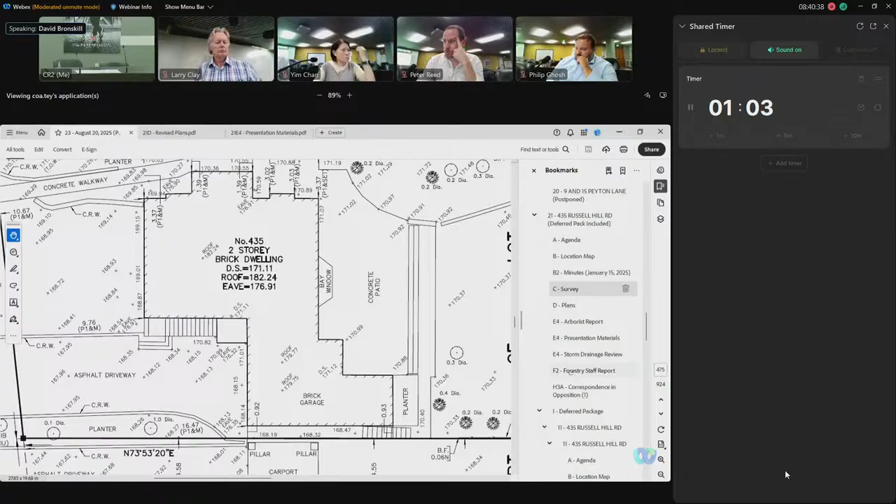Secondly, I'm not going to debate cultural history, but I will say, Mr. Chair, the building is not listed or designated. Heritage staff would have had the opportunity to do so through any type of process. That has not been done, and I don't think it would be appropriate now to use the Ontario Heritage Act to frustrate the application. You don't have any negative comments from Heritage or planning in respect of this application. Thank you, Mr. Chair.

All right, thank you, sir. Panel, any questions of the agent?

Phil, you're aware of the transportation condition? Yes, and through you, Mr. Chair, we submitted revised plans in response, to remove some paving from within the right-of-way, which we have done. So we are aware of transportation services. That revision has been made, but we would certainly accept that condition as a result.

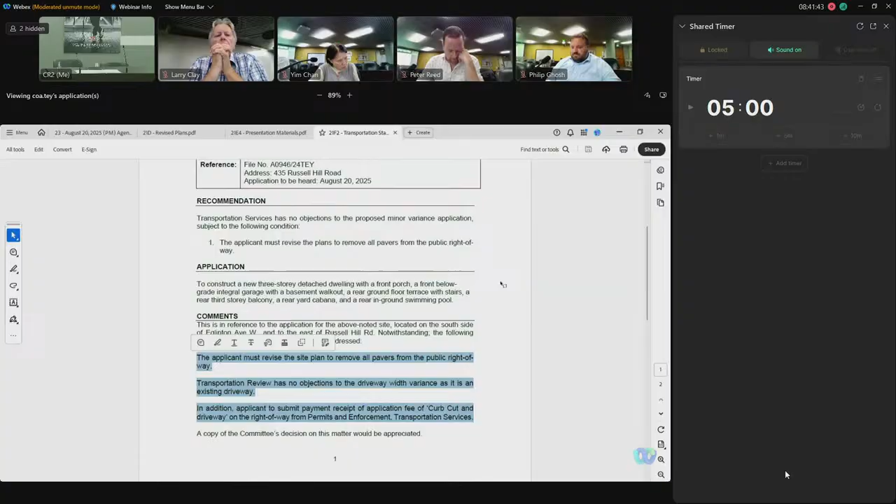Okay, Phil, good? Yep. Anyone else? All right, thank you very much. We'll take this into committee.

Thank you. Who wants to start us off? Phil or Peter?

Peter? Sure, thanks, Chair. I'm a little bit conflicted on this application. Usually my concerns with these sorts of redevelopments, and they all look quite similar, is the length and the depth. But I do really appreciate that a significant amount has been removed from those measures, even though it's mostly below grade.

But still, I was quite persuaded by the neighbor's representative in talking about the impact of the sidewall height, given the change in the grade. I think that does have a meaningful impact in terms of that interface between the neighbor's property, not necessarily right at the property line, but throughout their property, and having that new, larger massing closer to their property line at the front and the rear of their properties. To me, that's the most significant part of this application in terms of impact. I don't think I can support the application because of variance 1.

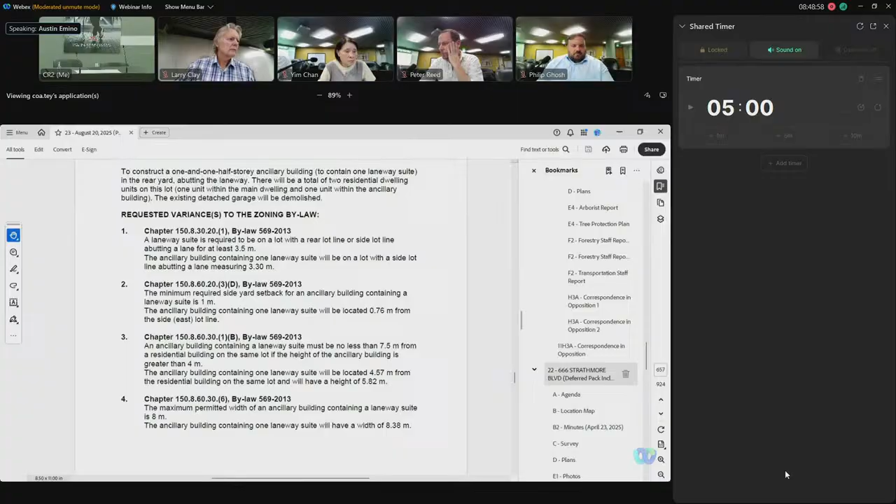Austin, you've been unmuted. Hello, my name is Austin Emino of 82 Formosa Drive in Richmond Hill, and I'm the agent for the owners.

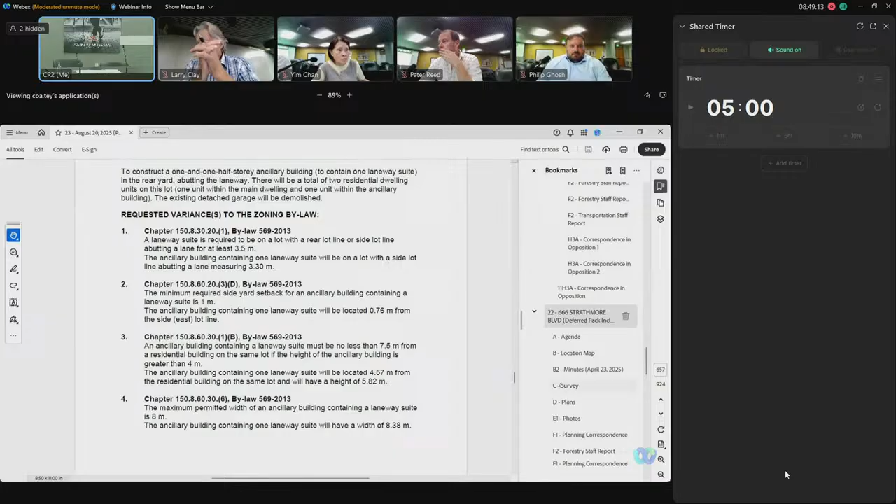You have seen the planning staff report that they're still recommending refusal? Yes. And you want to continue today? Correct. All right, then we'll need a presentation, sir.

Okay, so we're proposing to construct a 1.5-story laneway suite on the property. We did spend a substantial amount of time working with city zoning and planning staff during the zoning review process since September of 2024 to review and interpret the proposal in the best way possible due to the unique lot shape and zoning of our property.

They had advised us to review it as a laneway suite, so I'm hoping committee could have a pragmatic review of this application, given that the laneway suite is behind a house that's always been a house on this property and will continue being a house for as far as we can see.

The first 4 variances that we're requesting are based off the laneway suite bylaw itself, which I believe are minor in nature. For the one setback request from the lane of 0.76 meters, we saw that there's a transportation request to adjust it to 1 meter. So in that case, variance 2 would be removed as we would comply with that 1 meter setback.

The other 6 variances requested are based off our property falling under the CR, or commercial residential, zoning bylaw. Although our lot specifically and our immediate neighbors have always been for residential use as far as we can tell.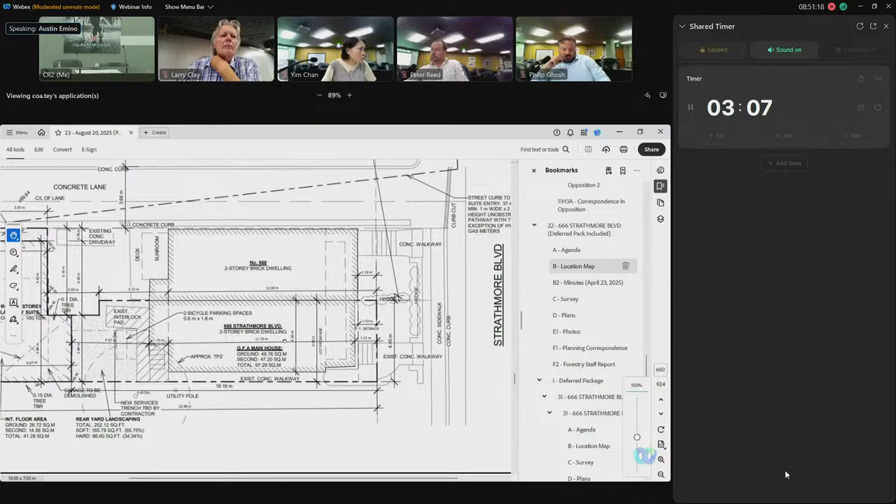So if we were to reduce the setback per transportation's comments, this variance would reduce slightly to 1.21, or 147.8 square meters for variance 6.

We did do some neighbor outreach back in April 2025, which was ahead of our original hearing date that we deferred until today. We did get a support letter from 10 Coleridge Avenue, which is across the lane from us. We also spoke with 1003 Woodbine Avenue, which kind of butts into the backyard of our lot, and they had no concerns once we explained the proposal to them. We didn't hear back from any other neighbors, so we don't think any neighbors have any concerns with our proposal.

We did spend a lot of time trying to work with community planning staff as far back as November of 2024, and then spent about 2 months going back and forth with them since deferring our hearing.

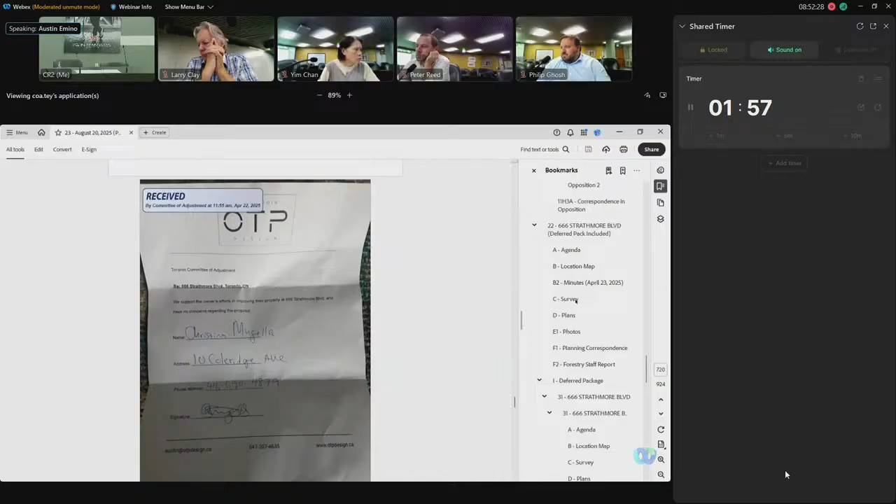Where we kind of got with that is that planning was suggesting we do a rear addition to the house instead, but we felt like the variances that would create and the impact to the existing house would create a lot of issues on the lot, especially since there's a neighbor tree kind of right on the property line near the back of the existing house, which we don't want to disturb.

So we kind of landed on sticking with the detached laneway suite structure, as we think it better fits the context of the lot and allows us to not impact that neighbor's tree beside us.

And I think we have the ability to create another housing unit in the city that is right next to residential uses. So the other side of the lane is all zoned residential, and there's actually a laneway house right across from us. We're just unfortunately zoned commercial residential on our side, but right across the lane is residential.

I think it makes sense to have housing here since we're close to the subway station, which is literally on Strathmore itself. So it's right across the street from us.

And if Committee of Adjustment would approve this proposal, we're fine with the forestry and TTC conditions and transportation's request to increase the east setback from the lane to 1 meter, which would remove variance 2 and alter variance 6. We hope that due to the unique lot shape we're working with and the site context of our proposal, that committee would agree that the laneway suite is suitable for this lot.

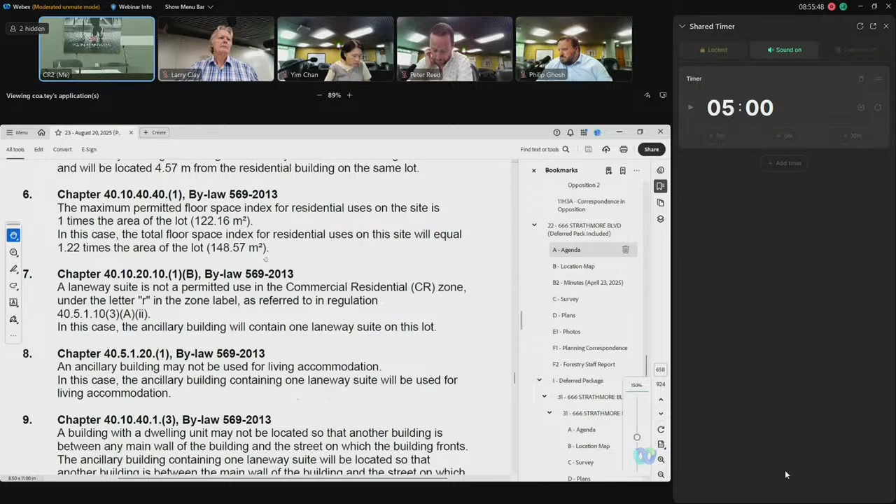So you're removing those now? Correct. Okay, so for variance 6, you're saying 1.21 times. What would that be in square meters? We just need the actual square meter number. It would be 147.80 square meters. 147.80? Correct. Thank you.

It's relatively rare that the committee goes against the recommendations coming out of planning. Did you have more recent conversations with them around the problems they had with your proposal? Because the letter they provided doesn't give very detailed reasons for why they're opposed to it. Since we deferred the hearing, when we were discussing the proposal with planning staff, what we got from them was that from their perspective, a laneway suite's not permitted in the CR zone by right, so they basically stopped their review there and didn't look any further.

And so with the revisions that we discussed, do you comply with the 1 meter that transportation services requires? Correct, we'll adjust our proposal to comply with that.

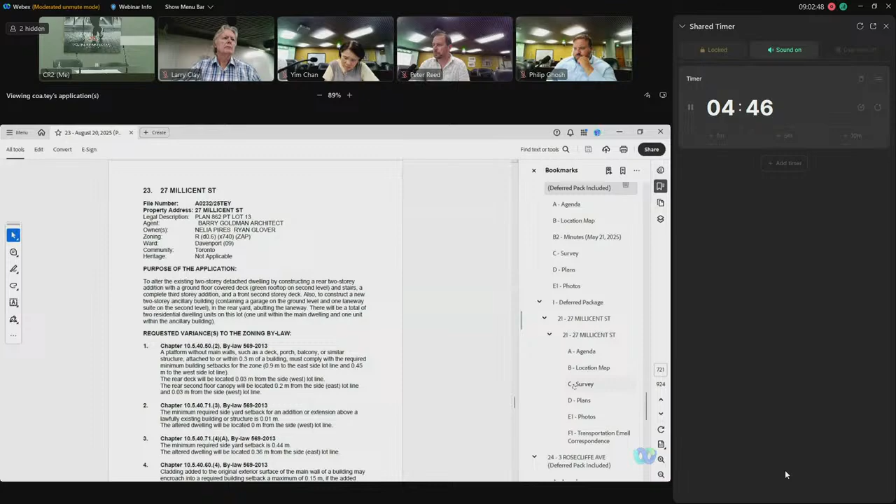Okay, so we did defer because the zoning examiner missed one variance. So we came back with a 0 side yard variance on one of the sides. Currently, the side yard is 3 centimeters, and we'd like permission to build right to the side yard, really just to add another inch of insulation on the exterior of the building. That was the reason for deferral.

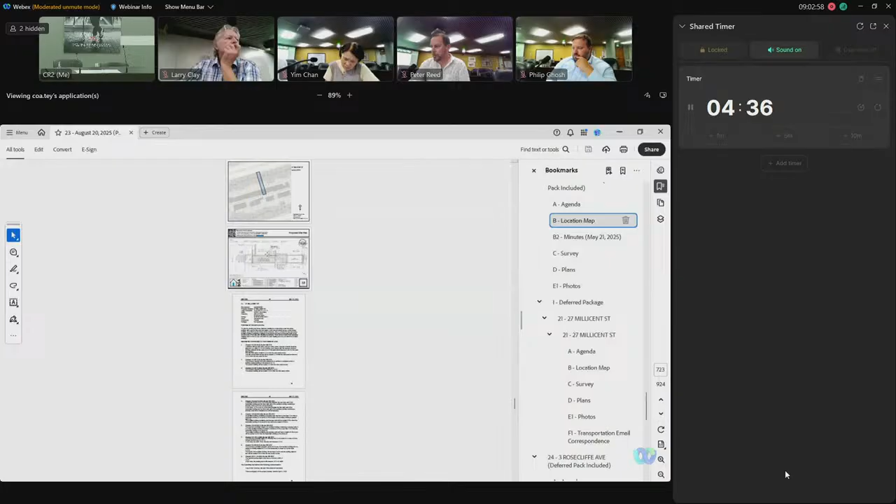The other change, thanks to the committee previously, was we improved the landscape in the rear. The existing landscaping in the rear between the existing garage, shown dotted on that site plan, and the existing rear of the house, was completely paved. So we've removed as much paving and installed as much softscape as we could while maintaining a pathway to the stairs up and stairs down. Those are all existing. So we are adding one variance, the 0 side yard setback, changing from 3 centimeters to 0. I'll point out the neighbor has no problem with it. And again, that's really just to remove the cladding, put an inch of insulation on it, and put the siding back on. It's imperceptible. And we did improve the rear soft landscaping.

Okay. Questions, panel?

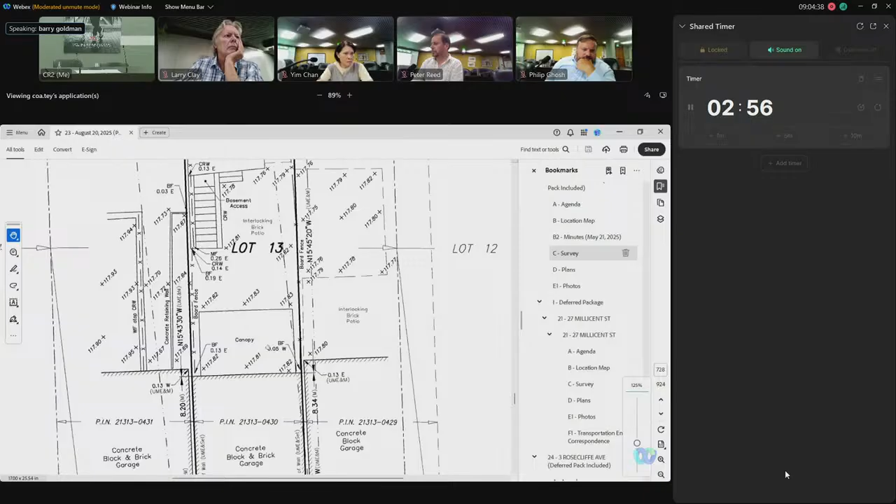Phil: So it's just building, it's using the existing garage and building over it? The existing garage will be demolished. The footprint of the laneway suite will come a little closer to the house than the existing garage. There's a pergola existing, labeled canopy on the survey. So in terms of massing, it won't really change. Our proposed laneway suite and ground floor garage at grade will line up with the existing canopy, so it's not covering any more of the backyard. The entire backyard now is interlocking brick, so we're de-paving as much of that as possible.

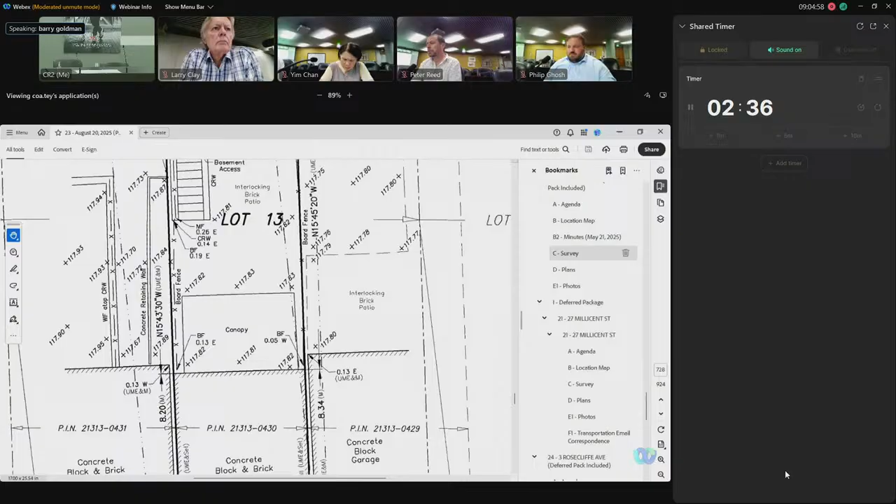You're still a little light on rear landscaping. If you're going to be rebuilding that walkway anyway, instead of interlocking, could you put permeable in? We're, for better or worse, using those interchangeably. It can absolutely be permeable. Happy to make us bound by site plan. It should have said permeable, I apologize for the typo. But I believe interlocking won't be a continuous surface, water will be able to get through it. Permeable pavers use different material than interlocking though—interlocking typically uses sand between the pavers, and permeable uses 1/4 inch gravel.

Okay, happy to commit to permeable, however the committee wants to make that a condition of the decision. Okay, panel, any other questions? No? All right, let's go into committee.

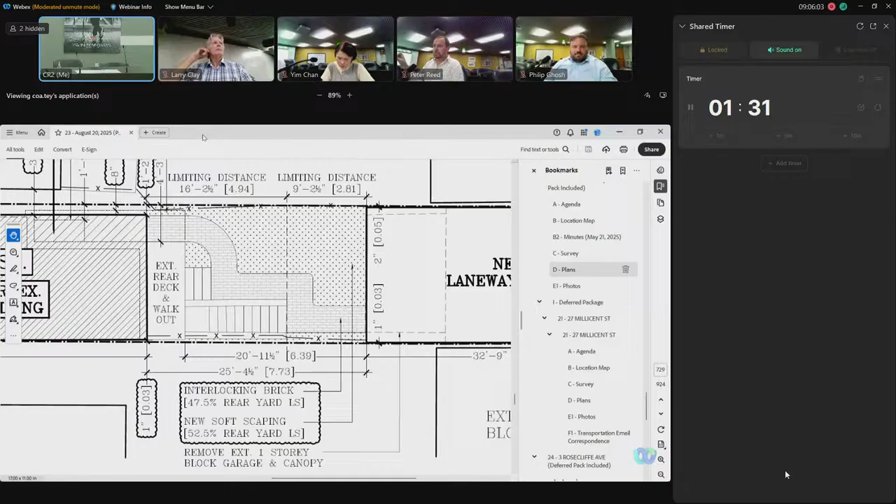Anyone want to take this one? Okay, sure. Yes, I think that although it seems like quite a few variances, I think most of them are things this site can actually accommodate, and although there's an opposition, we cannot locate the opposition or their comment, but I do not think it will create too much negative impact. So I will support this.

Is that a motion? I will also put a motion to approve with the condition for permeable pavers. Where is the location, in the rear yard? The rear yard walkway will be constructed with permeable material. Okay, all right. Motion to approve by Ms. Chan, second by Mr. Reed. All in favor? You have your approval, sir. Thank you.

Next item is item 24, 3 Rosecliffe Avenue. This is an application to legalize and maintain the rear one-story addition abutting the west portion of the existing rear one-story east side addition, as well as the complete second-story addition. There will be a rear ground level deck with stairs. Also, to legalize and maintain the new one-story detached one-car garage in the rear yard. These additions have been constructed without an authorized building permit.

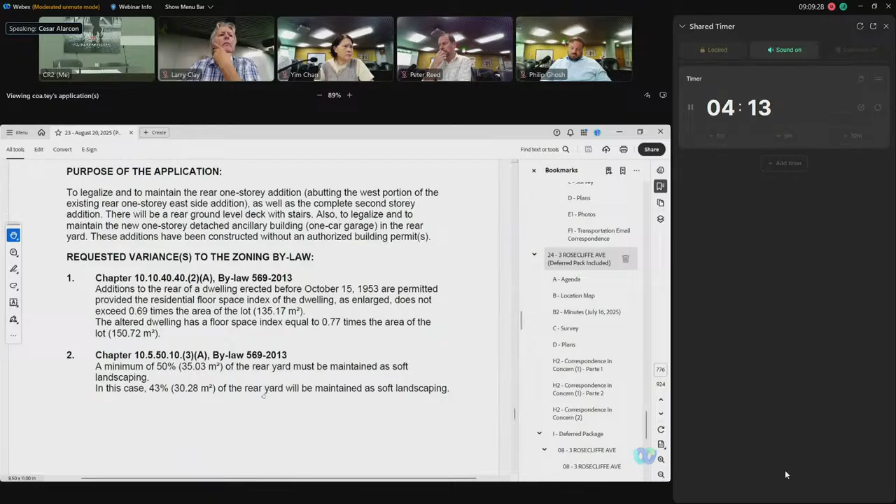The first one is the floor space index variance, this is for the addition. The zoning bylaw permits a maximum floor space index of 0.69. The proposed addition to the existing building will result in a floor space index of 0.77, representing a modest increase of 0.08. We believe this minor variance is justified as it will substantially enhance the livability of the dwelling by providing additional functional space while maintaining harmony with the surrounding neighborhood character. So we are not increasing any of the footprint of the existing house.

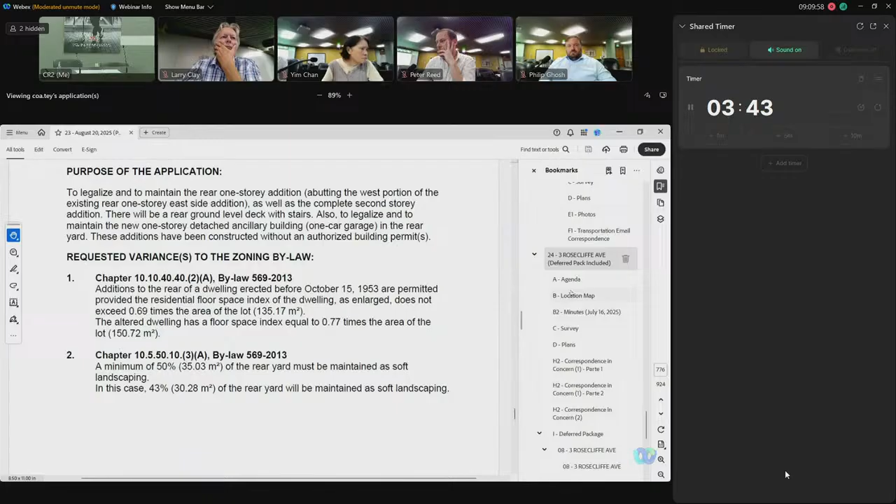The other one is related to the new garage. The rear yard landscape area, according to the zoning bylaw, requires a minimum 50% of landscaping in the rear yard. With the addition of the detached garage, the property achieves 43% landscaping, resulting in a variance of 7%. We believe this minor deviation is inconsequential to the overall character and environmental quality of the neighborhood, and we respectfully request that the committee consider granting this variance. So this is my exposition.

Okay sir, I didn't catch everything you said, but did you explain to the panel how this work was done without a building permit? Yes, originally the homeowner got a permit for an interior renovation. That was the building permit that was given to the homeowner. After this, they decided to build the addition and also to build this garage without a permit.

All right, okay, Yim. Yes, I understand what you said, but you know it is a substantial amount of construction though. From interior alteration, you're building the entire second floor addition. Is that addition that you consider to be renovation in the beginning, and then you went ahead and built it? Is that how it happened?

Yes, the homeowner decided to build that addition without a permit. Yeah, we understand that. We're just struggling with how that actually happened, and frankly, how you found a contractor that would do that kind of work without a building permit. It's my understanding that the homeowner is the one doing the construction. The homeowner did the construction. Yes.

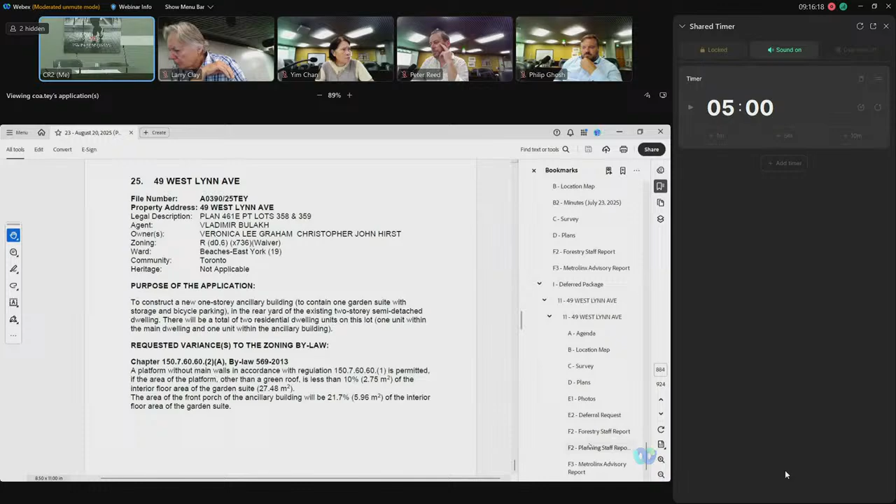No. Okay. Yim? If you looked at the staff report from the... Oh, my goodness, you're right. Yeah, staff are still refusing it. Yes, that's what I'm concerned about. Can you speak to that? That's because staff is still recommending refusal. Yes.

So our previous application was initially not for a garden suite, but just for an accessory structure with a similar form. The intent was to create something like a storage space and a little home office detached from the home in the backyard. And a lot of the variances were related to that. As a garden suite, the requirements of the zoning bylaw are different. So that only leaves us the front platform area that is still a variance that we need. So is this an outdated staff report, or did you get to communicate with them that they can address the current proposal, or are they okay with it? I have not received any comment from the staff regarding the revised proposal, but with changing it to a garden suite, it does eliminate the variances that I believe they were objecting to.

Okay, the July 15th email doesn't refer to a garden suite. It's just an ancillary structure, which at 5.33 meters would exceed the 4-meter bylaw restriction. So, okay. Any other questions? All right.